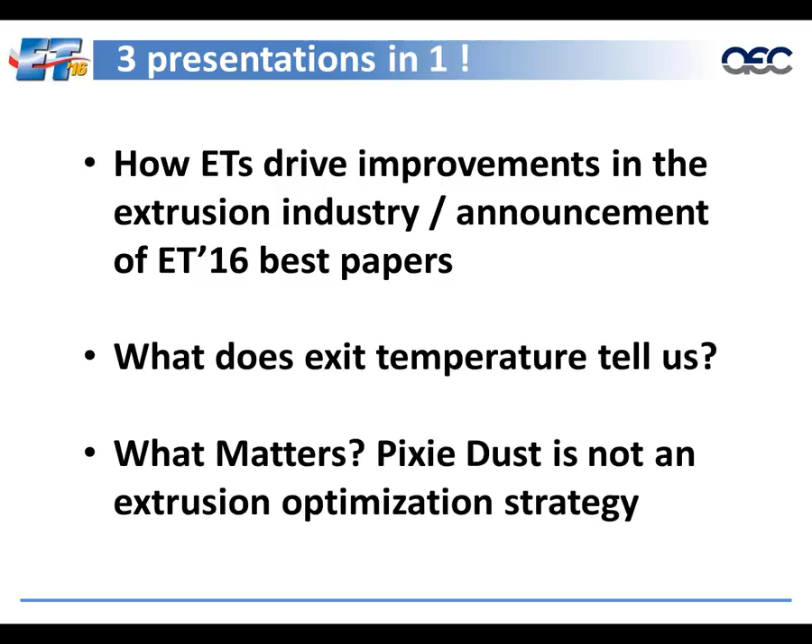Hello, everyone. Today we're going to have the opportunity to talk about 3 different topics. First, we're going to discuss how ETs have driven improvements in the extrusion industry, and we're going to give you a sneak peek at what the best papers are for ET. We're going to announce them. Second, Chris is going to tell us about his ET paper on what exit temperature tells us. And the third part of the webinar will be my paper on what matters, pixie dust isn't an extrusion optimization strategy. So let's dive right into it.

Just a quick thing on my background. I've been around aluminum extrusion my whole adult life, working for different companies, Alcoa, Werner Extrusion Solutions and Consulting, and now with Kaiser Aluminum. Enjoyed every single one of them. And I've been involved in ETs for over 30 years as well, from the time I started in the industry in 1983 until the present, in all different types of roles.

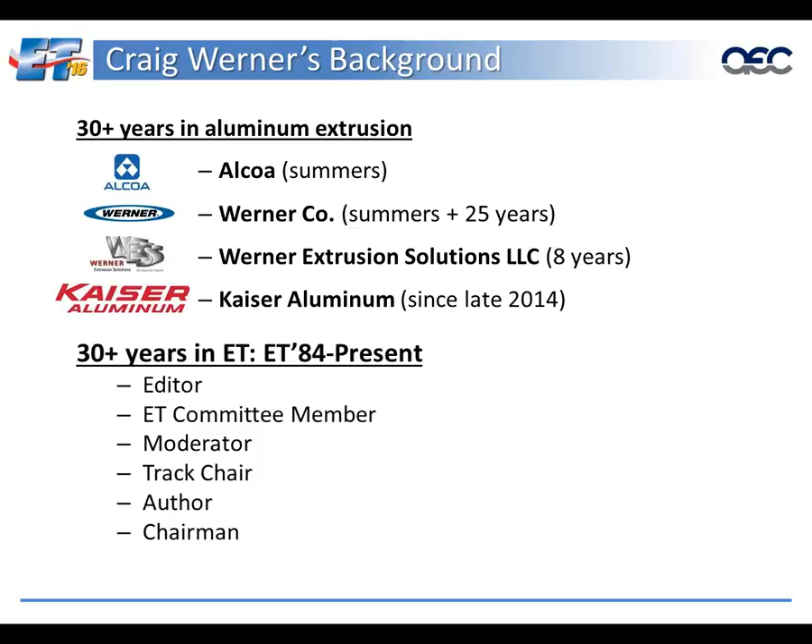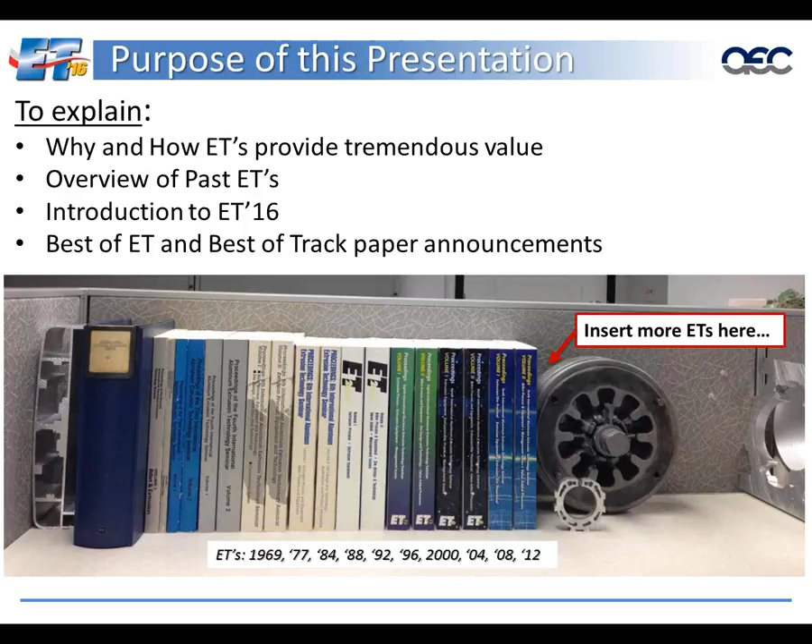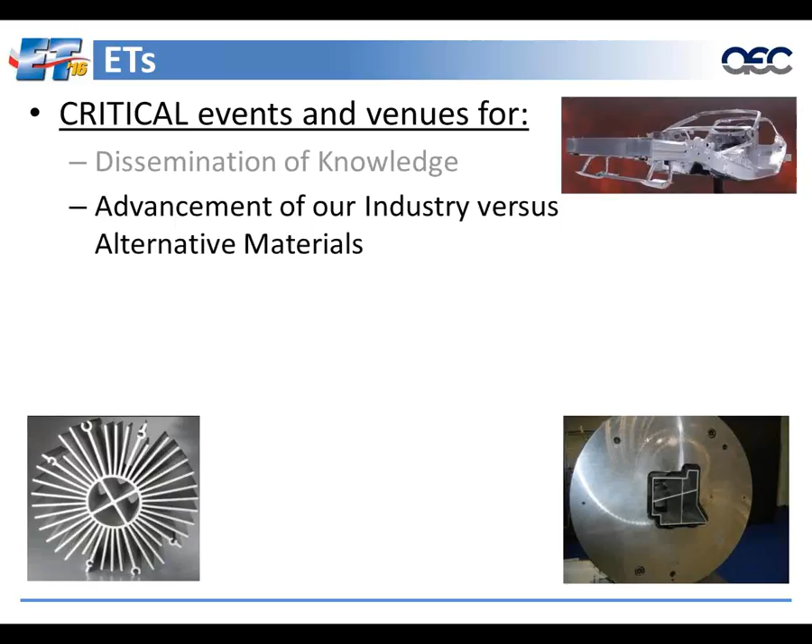I like this picture because it gives you an idea of the quantity of papers that have been published. Later you'll hear that over 1,400 papers will have been published by the time ET 2016 is over. But all of these books from left to right represent all the ETs and the proceedings that went on. There's tremendous value here. There's room for more ETs afterwards, and the next one, as Lisa said, will be in 2020. So ETs are a critical event for disseminating knowledge among our industry and for helping to advance our industry versus alternative materials. We compete with each other, but we also compete with alternative materials.

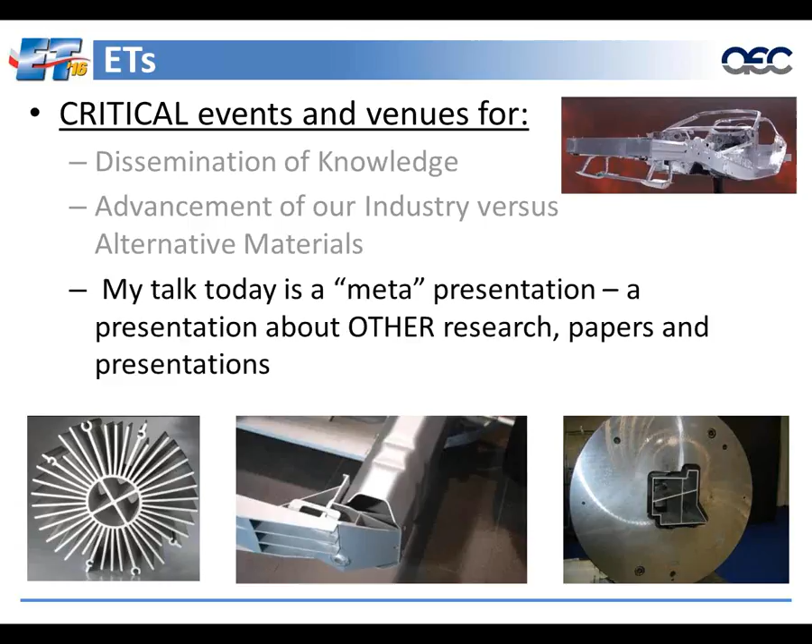My talk today is going to be a talk about presentations, about other research, about papers, not necessarily about anything in particular other than ET, which is critically important to all of us.

ETs help us to drive improvements in the material and alloys, our processes, our equipment, and our overall industrial knowledge base. It assists all of our different customers by helping us as suppliers to do a better job. It also helps our customers understand why extrusions are powerful design solutions, a little bit about our materials and processes, and how to create effective and efficient designs.

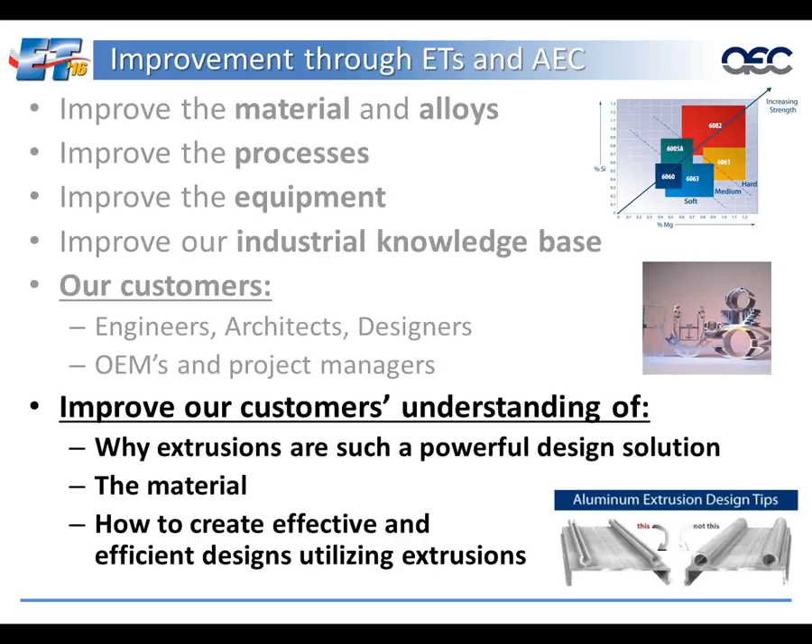There's a number of things that come out through ETs and other AEC venues. So the ETs, as we've listed, from 1969 till 2016 now, over 1,400 outstanding technical papers. We were at 1,289 as of ET 12. And for me, what's always exciting is to get the ET schedule and just start circling all those papers that we want to go to.

Often there's multiples, there's 5 or 6 tracks happening at the same time, and we have to choose. Got to make some tough choices, but at least you have all the paper presentations to lean on afterwards.

We use something called ET time, and it's not a funny thing. It's actually serious. ET time is very, very important because we all rely on being able to go to all these different papers and events.

And Bob Werner taught us something about ET time. First of all, he taught us that time marches on. There's a lot of different people, volunteers and professionals working on at the AEC and on the ET committee. And Bob learned how to drive things through impending events so we could continue to move forward.

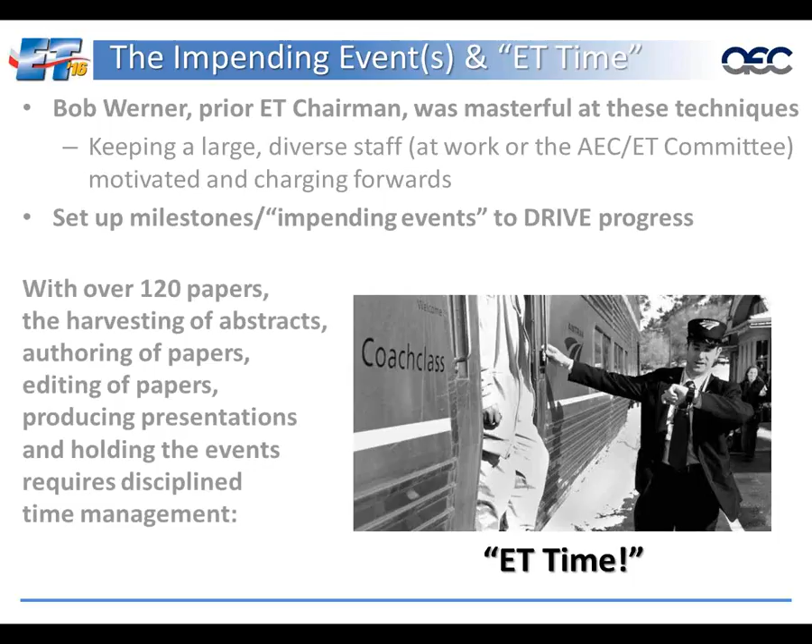This was important because we've got over 120 papers. We've got to go through all the abstracts. People have to author the papers, edit them, produce the presentations, and a lot of work behind the scenes to get this done. And we keep things moving over the 4-year ET cycle.

We have a saying, please set your watches to ET time, and that's important because during these sessions we have a number of general sessions and a number of overlapping tracks that meet at the same time. During those tracks we have 20-minute presentations followed by a 5-minute Q&A and a 5-minute chance to change rooms if you want to between the papers.

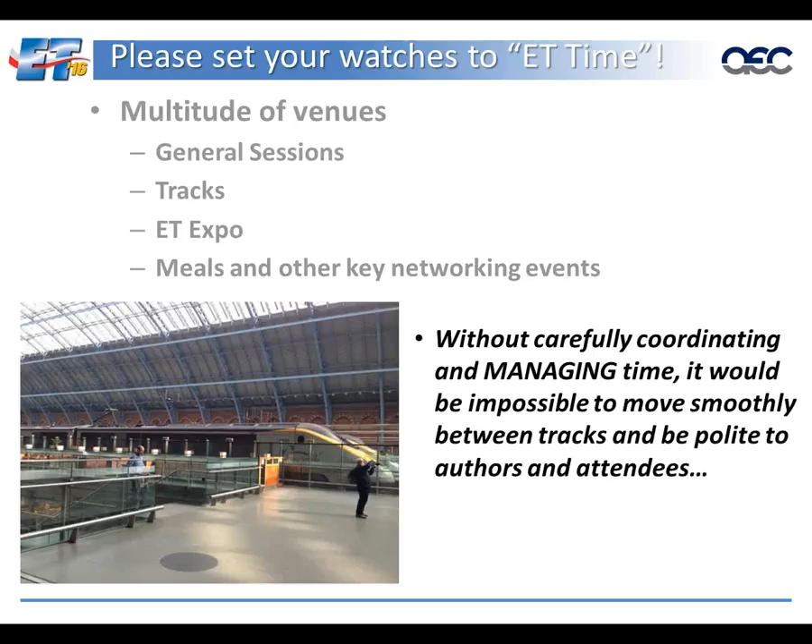If you don't set your watch carefully, you won't know exactly when to leave or arrive in the next room to make sure that you're not interrupting anybody. So it's very important that we all keep track of the time. Without this, there would just be no way to have a smoothly running conference. So we'll remind you of that at the beginning of ET.

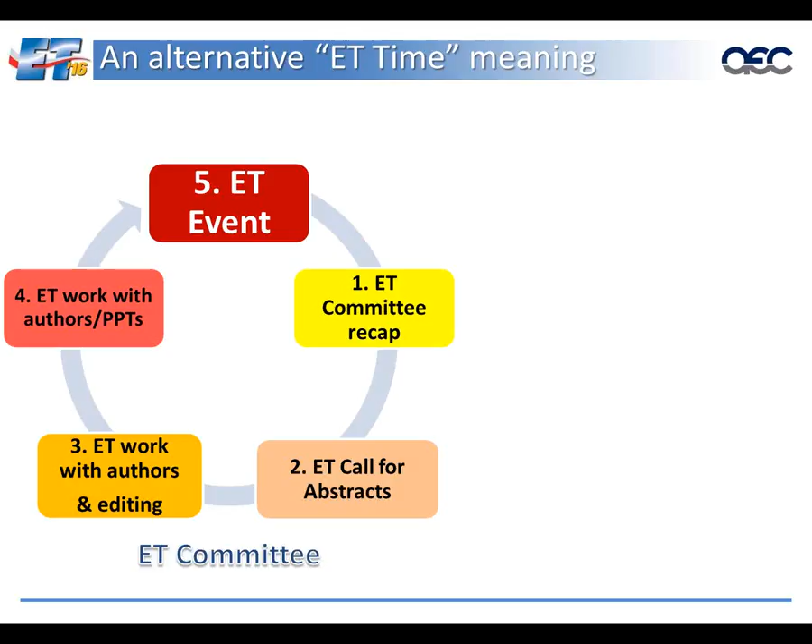The other alternative meaning of ET time is the ET committee works through: first we start with a committee recap of the last ET. We send out a call for abstracts. We work with the authors on their papers and presentations. And then finally we hit the big event, number 5.

At the same time, you've got companies and universities on their own time schedule, working through their project concepts, technical development, and finally completing their papers and presentations.

ET is the sole event worldwide and the most important event worldwide that focuses exclusively on the materials, equipment, processes, and other things related just to the aluminum extrusion process.

The presenters that we use have been vetted to give us some really excellent work and value to all of our attendees. ET is a worldwide offering, and we bring the best research, technical, managerial, and other concepts from around the globe. And all of those people who are also from all around the globe come not only to benefit from the presentations and actively participate, but they get to share knowledge and network with other people.

And there's simply nowhere else on earth you can go to see so many aluminum extrusion people working together, sharing information and networking, just on the topic of aluminum extrusion.

So when we look at ET, it's made up of a number of things. We have the team that's set up, we have the abstracts, the published papers, the presentations, the venue where it's taking place. We have the ET Expo, which is the exhibition hall. Alyssa said we have 120 different exhibitors. We have the showcase where we see examples of different extrusions and how they're used. And probably most important, we have the networking opportunities to meet with your peers from all over the world.

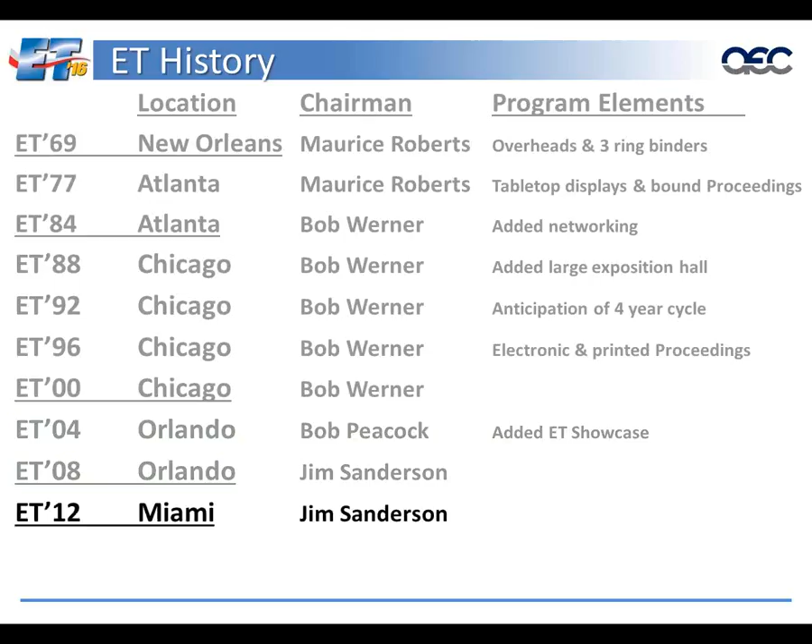In the next 2 ETs, 04 and 08, held in Orlando, the ET Showcase was added. ET 12 was in Miami. And ET 16 is in Chicago, back again to Chicago.

At a high level, when these ET papers are written, whether by a company or university, the concept has to be conceived of and approved. You've got to schedule all the work, the studying, resources, lab time, production time. You have to develop hypotheses, run experiments to test them, and adapt plans depending on results. You might have to make changes, then finally draw conclusions. But you're not done then, because you have to draft the paper, submit it for approval, get the final technical paper sent in and approved, and then finally the presentation needs to happen. So these authors, presenters, and all the technical people behind them put in a tremendous amount of work preparing for ET, and we thank them for their contributions to our industry.

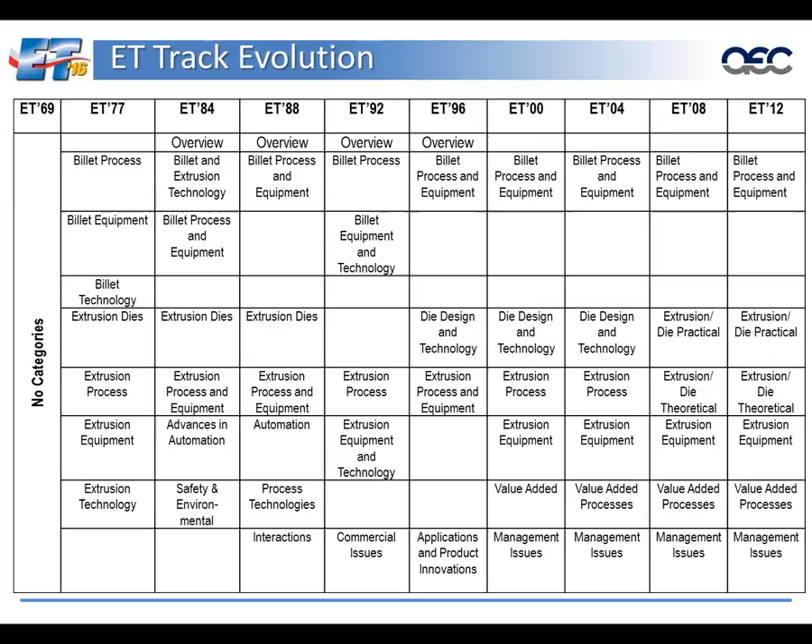I'm not going to go through this slide in detail, but it's from a light metal age article I published years ago, and it shows the evolution of the tracks over the years, which is interesting. We've settled on our more traditional tracks in ET8 and 12, even ET4. But looking back in '69, there were no tracks at all, just a bunch of papers. The tracks allowed us to organize things, collect papers under different categories, and advertise for the need for papers in these categories.

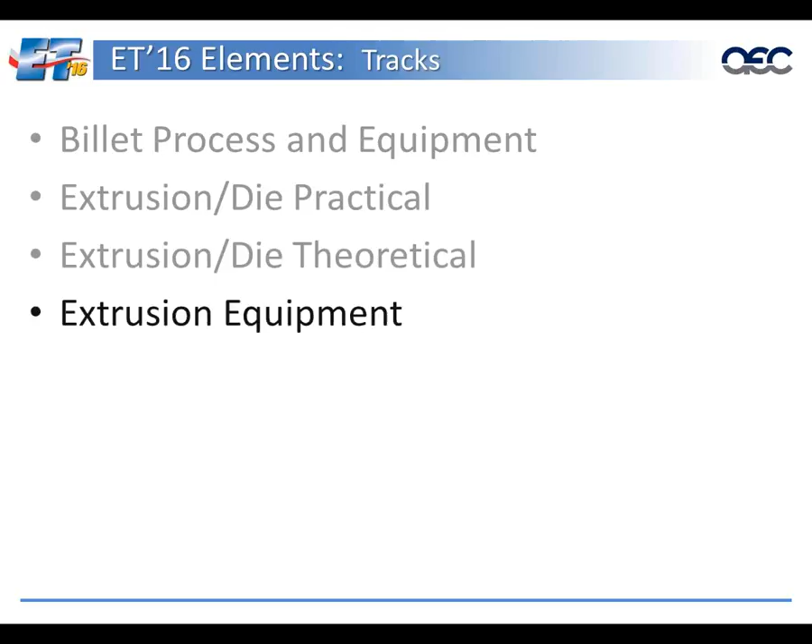So the tracks we have for ET16 are billet process and equipment, extrusion and die practical, extrusion and die theoretical, extrusion equipment, value-added processes, and management issues. Those are our six tracks.

At ET, we have companies and universities working together, and I used the word co-opetition I found somewhere. We have researchers and authors working together, sometimes alone, sometimes together, and they're not competing, but sharing to improve our industry. Because while we compete, the true competition is the alternative technical solutions and materials available besides aluminum extrusion. We want to make sure extrusions are used in the designs and applications where they're the best solution.

This ET, we're going to have papers covering alloy and process controls to help us make better products for key industries like automotive. It's going to cover casting technology information where we'll learn about billet quality, extrusion process, and the resultant product enhancements. There'll be aids to product designers and extruders to really understand our total value stream and how to optimize it. There are some novel extrusion equipment technologies that will be set forth, explained, and demonstrated.

As always, some key die design and maintenance approaches to improve quality and cost in our operations. Some alternative approaches to finishing for enhanced performance and environmental impacts. Key safety concepts are also always discussed at ET—it's a critical thing that we cover. And we'll all learn more about key extrusion variables and how we can use these things to best optimize our productivity, quality, and costs.

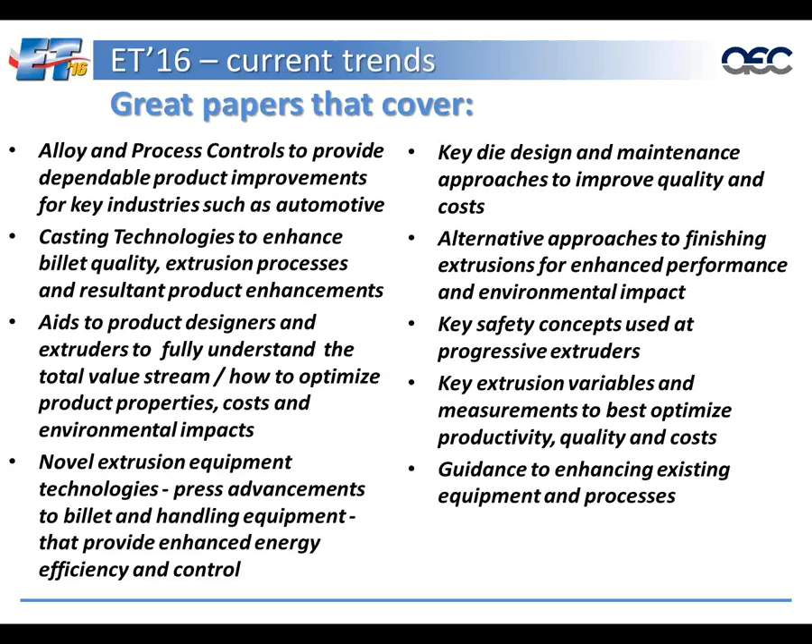So the best paper of ET16 is Extrusions for Automotive Crash Applications from Rio Tinto. Congratulations to them. And now we're going to go into the best of the six tracks.

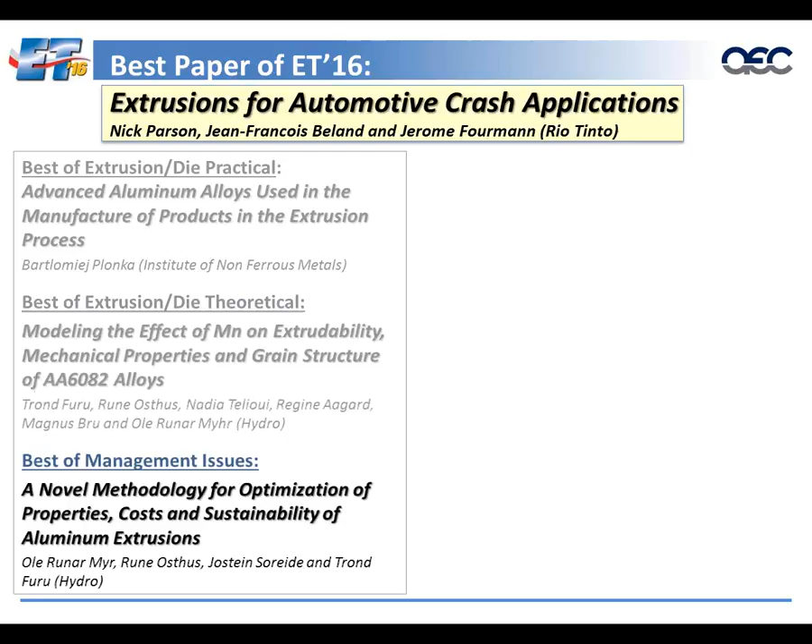The best of Extrusion Die Practical is Advanced Aluminum Alloys Used in the Manufacture of Products in the Extrusion Process. Best of Extrusion and Die Theoretical is Modeling the Effect of Manganese on Extrudability, Mechanical Properties, and Grain Structure of 6082 Alloys. Best of Management is A Novel Methodology for Optimization of Properties, Cost, and Sustainability of Aluminum Extrusions. Best of Billet Process and Equipment is Innovations in Billet Casting and Homogenization. Best of Extrusion Equipment is the Hybrex, an innovative extrusion press with hybrid drive technology.

The best of the value added paper will be on surface topography of aluminum extrusions after caustic and acid etching, and its implication for defects.

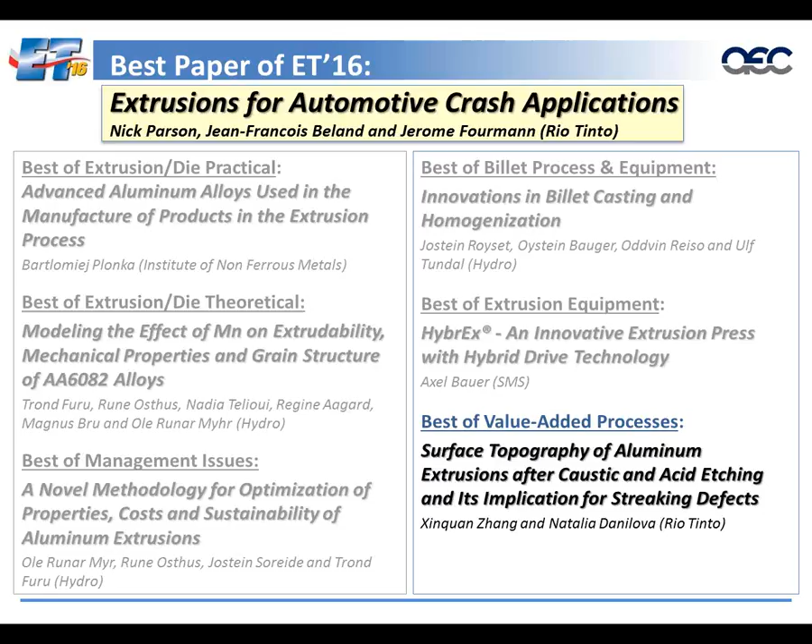One thing a little different at this ET is that all these best of papers won't be competing with some of the other papers. So when you review the schedule in detail as you map out your plan, you'll find that everyone will see the best of ET paper on top, but out of the 6 below, you'll get to see 3 out of those 6. There'll only be 2 of them competing with each other at any given time, which is a change to our process.

The team that makes up ET is the upper level team, myself and Jim Sanderson and Bob Peacock, both past ET chairs, with a lot of experience there. And then there's a committee of over 30 people that work with the authors and the staff to really deliver an outstanding conference for all of us.

And speaking of outstanding support, we get that from the AEC staff. We just have some terrific people that keep this process moving through the 4-year cycle and make it all look easy when we show up at ET.

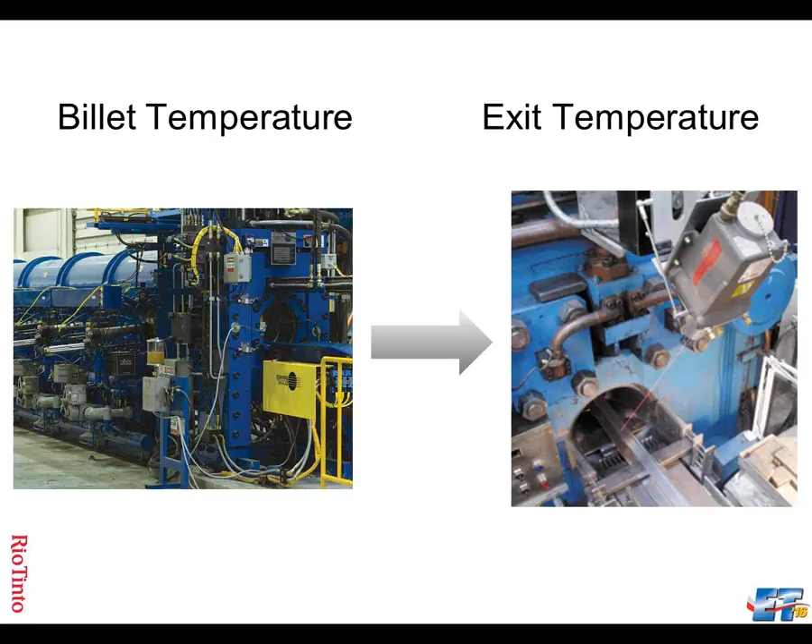We measure 2 basic temperatures: billet temperature and exit temperature. We don't really measure a lot between there. We control die temperature, we control container temperature, but we don't really measure temperature rise in the container, or what's happening in the die as we extrude. Although it's quite easy to do so in the lab, it's not something we can do easily in production.

However, when you think about it, there is another benefit. It can help in achieving consistency. It tells us if we're running at a certain exit temperature as measured by the pyrometer, then it tells us we're running the same as yesterday. We can produce consistency. But this is only useful when you say, for example, for die 1234, exit of 1050 Fahrenheit is perfect, and then we can run that every day and get good consistent material, consistent performance.

Exit temperature tells us nothing about what's happening at the bearing, what's happening in the container as the metal flows through, which really is the thing which determines finish and die wear.

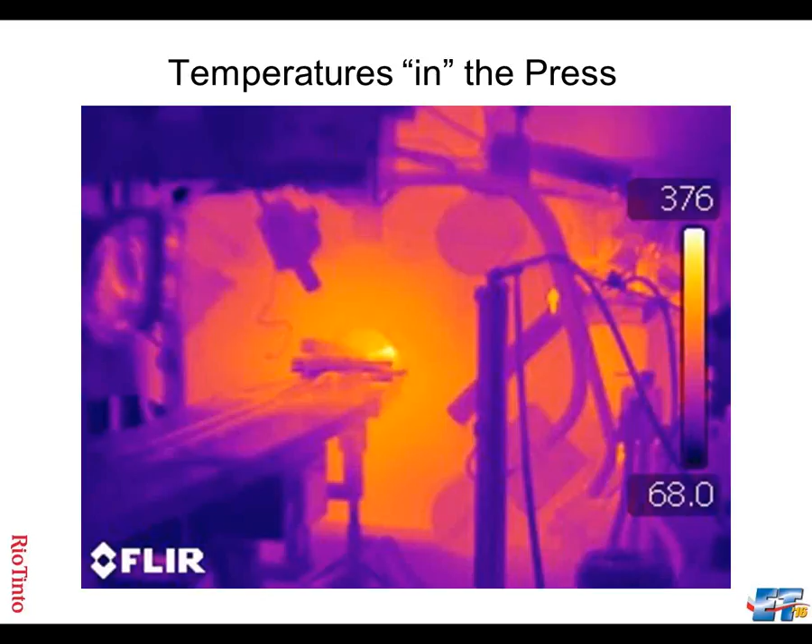It shows us that what we measure at the exit of the press is substantially colder than what's happening at the bearing. What we wanted to do with this paper was relate these two, find the rules which relate measurements at the optical pyrometer with what is happening at the die bearing. If we can calculate the bearing temperature using optical pyrometer values, we're getting much closer to maximizing productivity and speed.

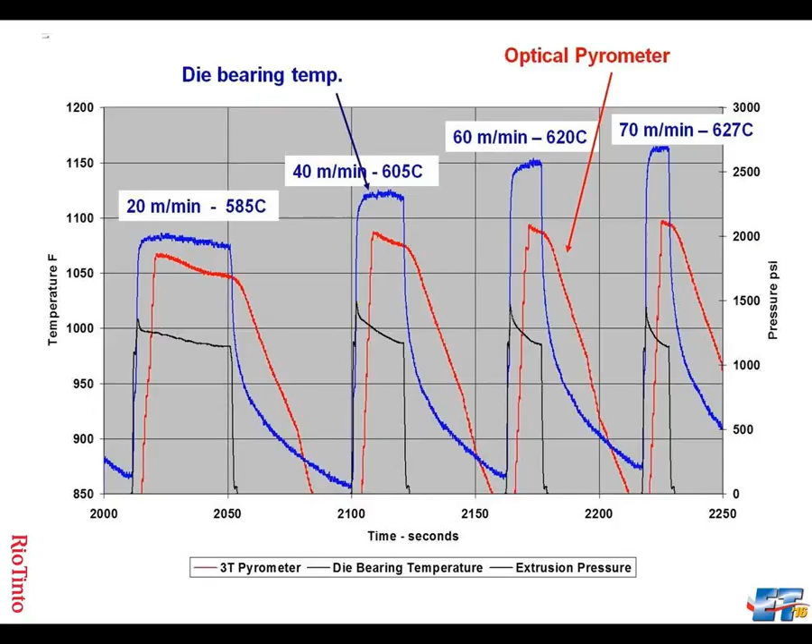This is some data we recorded a long time ago, back in British Alcan Extrusions days. What we did here was run a series of dies at maximum speed. Maximum speed we determined as being the beginning of speed cracks, surface melting, a bright surface, which is about 1160 Fahrenheit, 630 Celsius. We found that the measurements of the optical pyrometer at this point were substantially lower than the bearing temperature. Yes, we know that.

However, it did seem to vary with profile thickness. It's an interesting observation. For example, if we want to run a profile which is, say, 60 thou wall, 1.5 millimeters, as fast as we can, we should really be looking at a pyrometer value of about 1075. If we run a profile which is 5 or 6 millimeters thick, we really can't go much above 1015 Fahrenheit because we're going to produce a melted surface. This tells us there are some interesting relationships.

So what we decided to do for this paper, since we can't measure this stuff on a production basis, is to model it. We used a commercial finite element package, Deform 2D, in fact Deform 3D. We used it for simplicity, along with a very neat tracking tool.

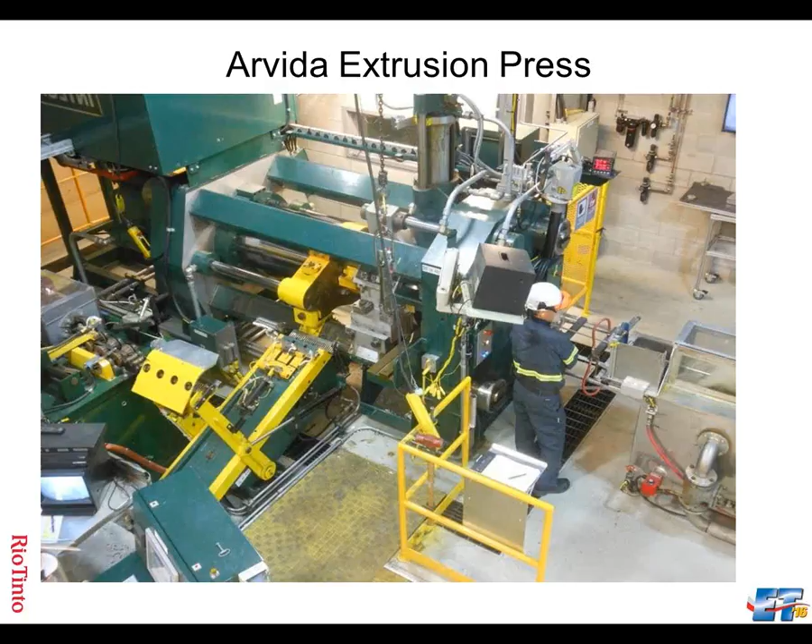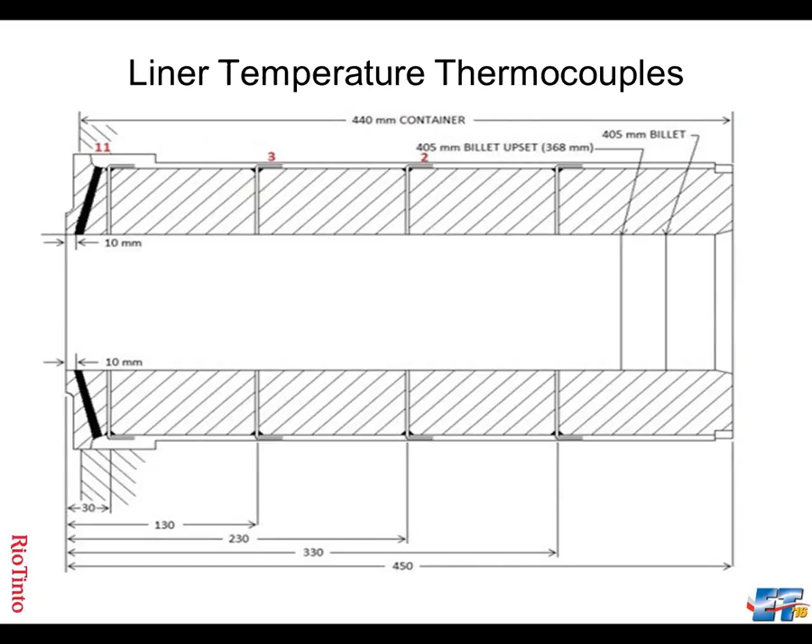The first thing we measured was container temperature. On this press we have thermocouples located at the liner wall, so we can measure accurately the temperature of the billet as it extrudes. And the kind of data we got was this.

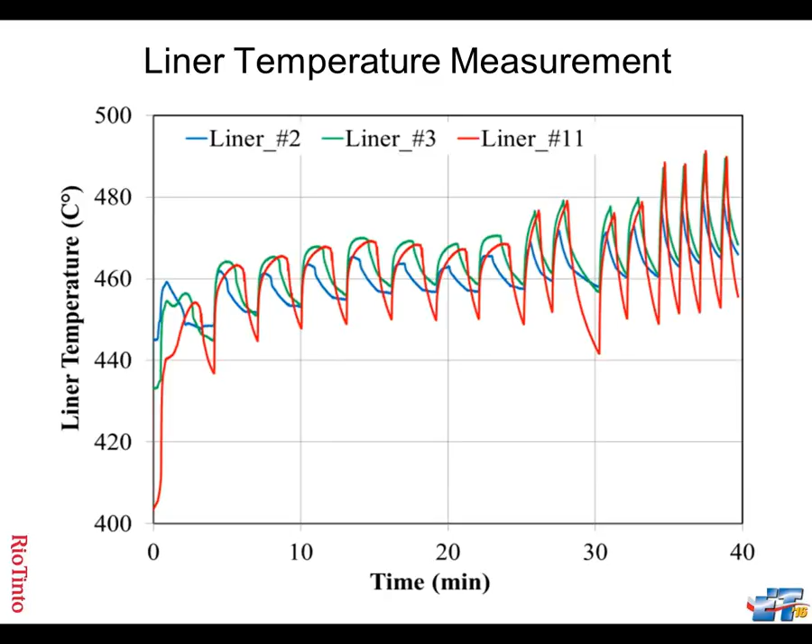This shows the liner thermocouple varying on a 16 billet run: 4 billets to preheat, 4 billets at low speed, 4 billets at medium speed, and 4 at high speed. It shows the cycling, and shows us that the thermocouple located near the die end of the container has a temperature rise of something like 450 to 490, about 40 degrees Celsius. This data we can use to see how the model can predict this sort of information.

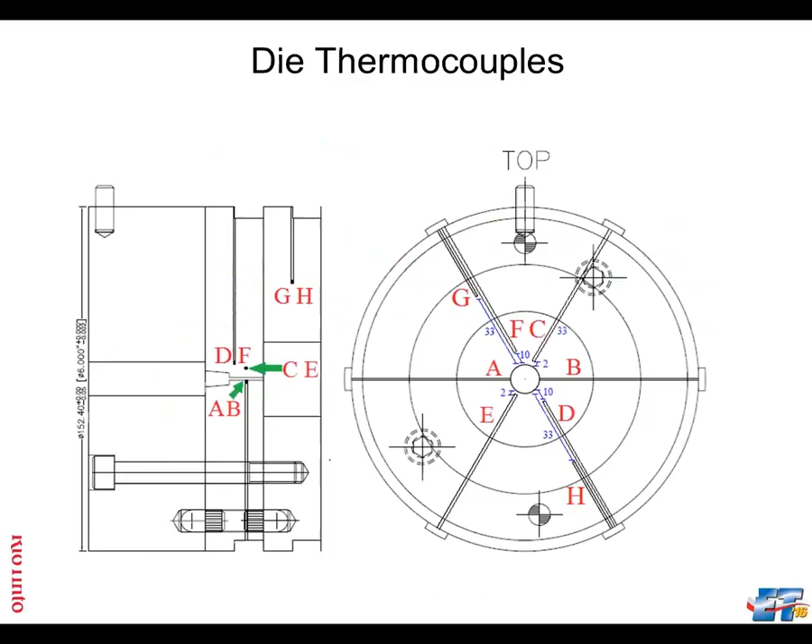The second thing we did was run this die. This die we used for these tests was a simple half-inch bar. We filled the die with thermocouples and measured temperature, and this is some of the data we got, again with this 16-billet run. If you look at the right-hand side, when we're running at high speed, the temperature at the bearing varies between 440 up to 600.

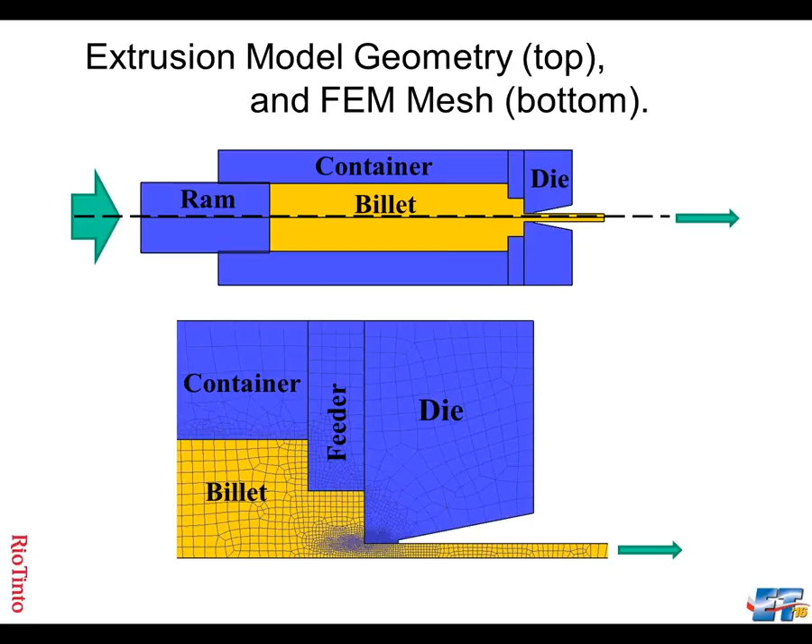So with this data, we could test our model, and this is the model we used. As I say, it was DEFORM 2D in this case. The upper figure shows the model, the bottom figure shows the mesh, which allowed us, and I'll just give an illustration of the kind of information we got from this modeling.

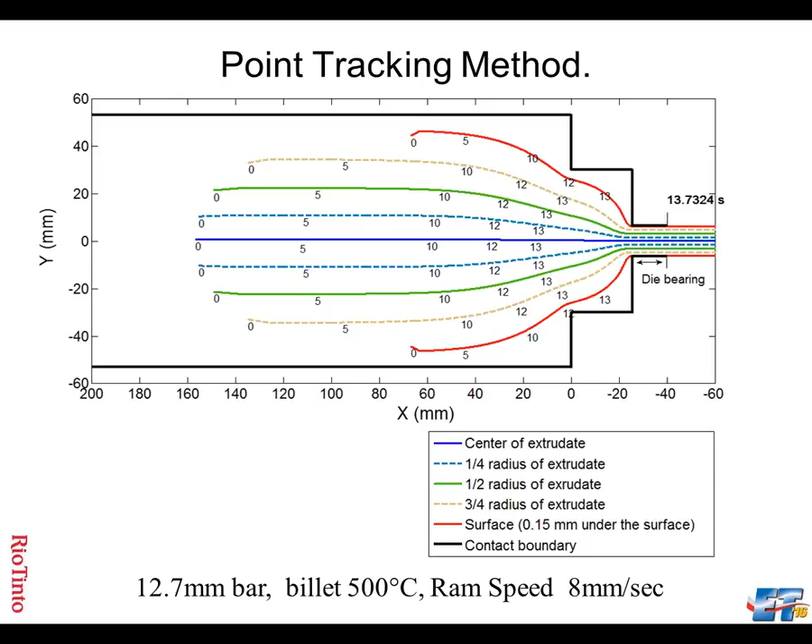We used a point tracking method, which is a rather neat way of measuring and predicting what the temperature is through the thickness of the profile and throughout the container. On the plot you'll see numbers, that is time. You can see the metal is the red metal, for example, on the outside, the red flow path, which is the material going to the bearing. It runs a lot slower than it does through the center. This is in seconds.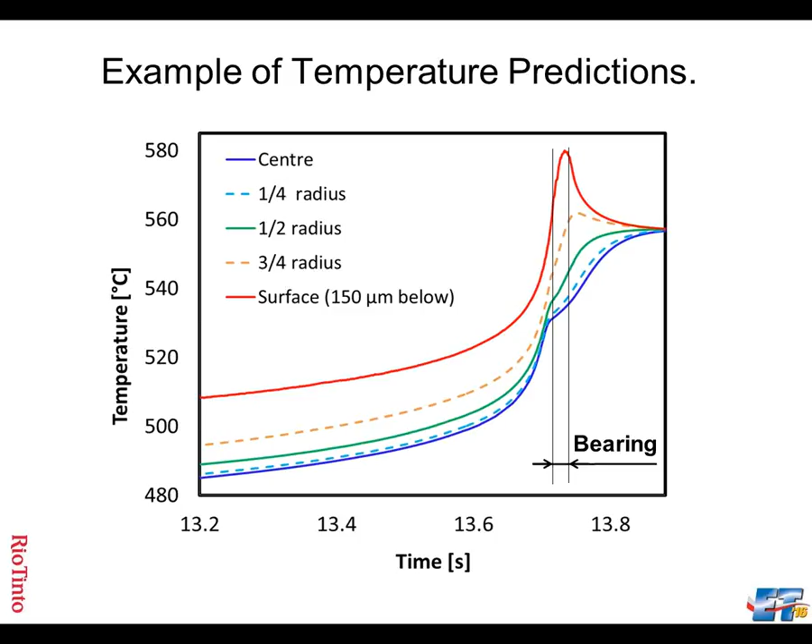And we have the plots at various positions across through the thickness of the profile. What is really interesting with this is how fast the temperature drops between the surface and the core, and the material becomes more uniform temperature. It drops to 560 Celsius, and this occurs within about 0.1 of a second. And I'll just show you a couple of illustrations of extremes.

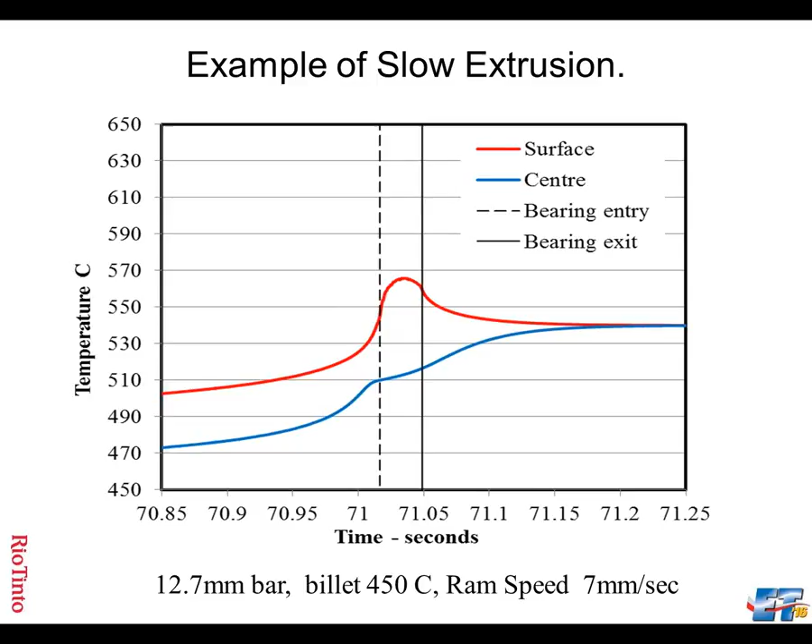This shows the flow of metal through the die at low speed. Surface temperature something like 565. In this case, we're showing at low speed the temperature drops from the surface of about 1050 Fahrenheit, drops to about 1000 very rapidly. In this case, it's 0.2 seconds between the maximum and by the time it reaches uniform temperature. So this gradient has vanished very fast.

We often think, we believe that dies run hot, and by the time we measure them, it's cold, and we think it's something to do with cooling. It's not. It's purely due to conduction within the profile, and within 0.2 of a second we have a uniform temperature. And I'll just show you this plot.

Maybe it's not that clear, but the upper curve here shows what the metal flowing across the bearing does. It rises up to a temperature of 1020 Fahrenheit, cools within 0.2 of a second to 945 Fahrenheit. By the time we measure it at the press exit, it's 930. So the cooling is only 15 degrees, but the actual conduction and the reduction of this gradient happens in a matter of 0.2 of a second, and it's well over 100 degrees Fahrenheit.

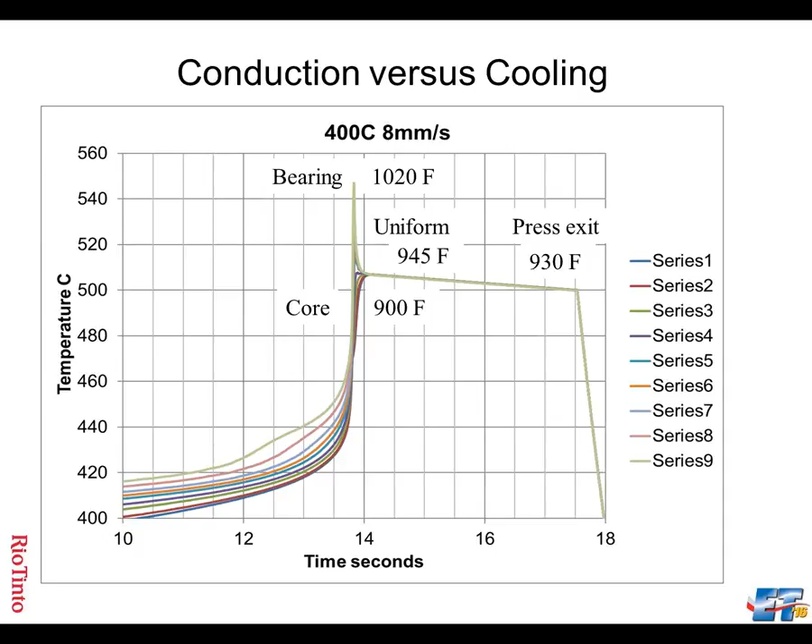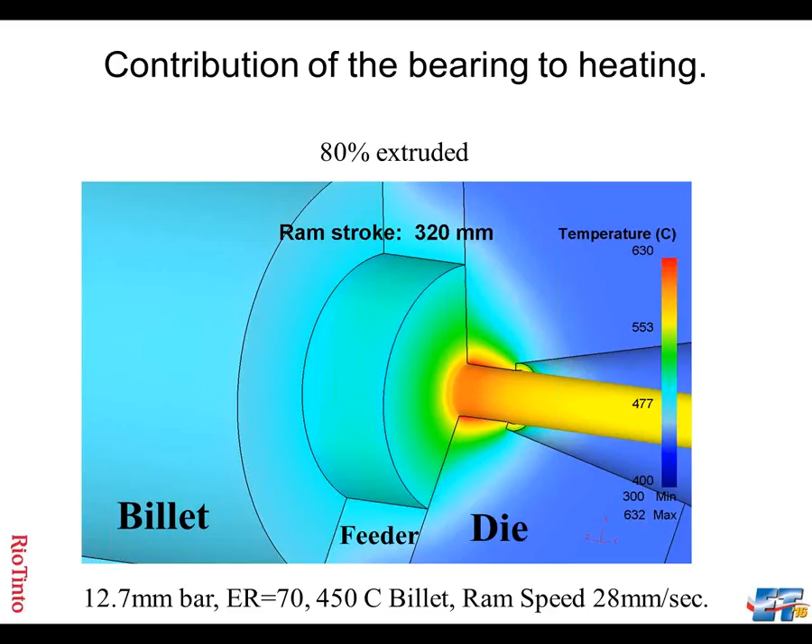And I'll just show you a couple of illustrations of the kind of thing we can model. This is 5% of this material extruded. This is 30%, 80%. You can see that the temperature is extremely local. The material, after leaving the die, becomes uniform in temperature within a fraction of a second, long before the metal's left the bolster. We're never going to be able to measure this. That's why we think modeling is so useful.

Just to give you a couple of other illustrations, what can we predict? This shows the surface temperature in the bearing. It's a 15mm bearing for this profile. You can see that the temperature is hotter, obviously, as you extrude faster. The maximum temperature is in the middle of the bearing.

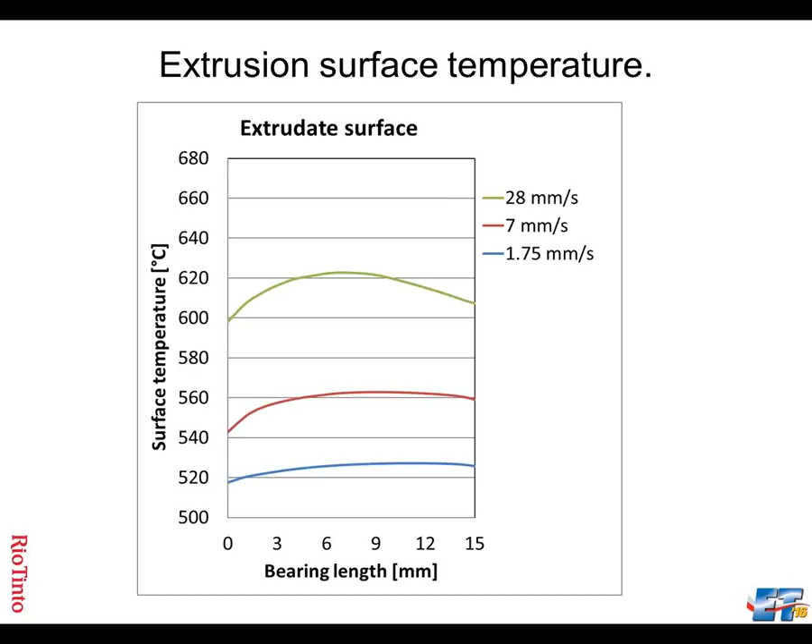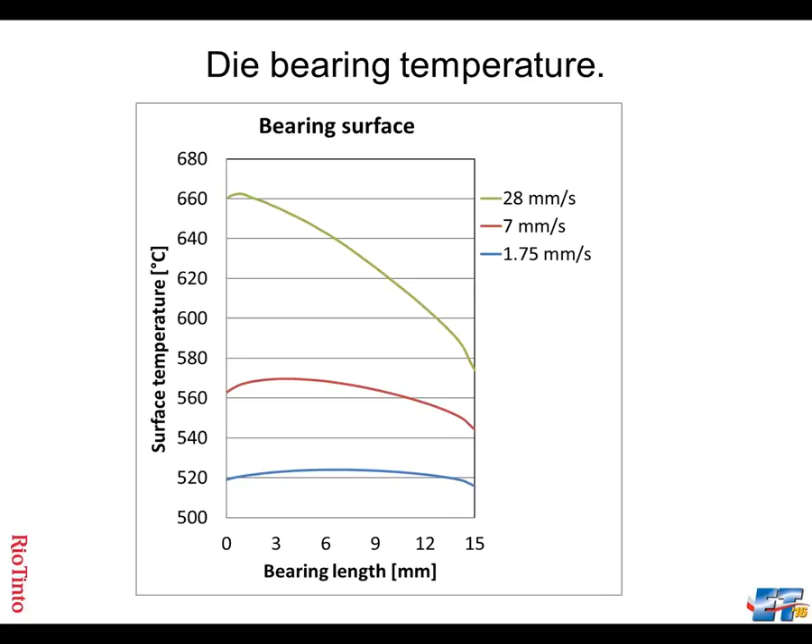This is the profile. If we look at the other data, the temperature of the die, it gives a very different picture. It tells us that the temperature of the die is again a lot hotter at high speed, but the temperature is highest at the entrance of the bearing, and it drops throughout the length. This maybe is not expected, but it certainly tells us why dies wear at the entrance part. They tend to start washing out at the entrance part of the bearing, not at the very entrance, but near the front of the bearing. And it tells us there is a difference between die temperature and extrusion temperature.

This illustrates and demonstrates the difference. It shows that all the heat is being generated, and you ask, why is this so hot at the entrance and not the back, considering there is continuous shear on the bearing surface? It's mainly because the die is not uniform, and the exit side of the die is colder than the die face. We have a perpetual supply of hot metal coming in, adding heat.

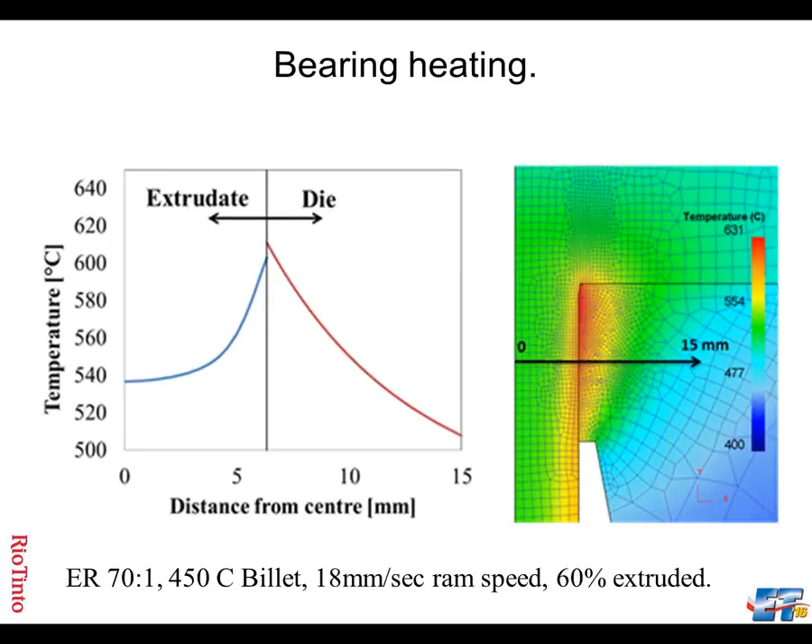So, some conclusions. This is a very brief summary of the paper. We've basically developed a model which gives us very accurate alloy temperatures, and it can predict temperatures in the liner, in the container, which our data supports.

The temperature of the die bearing, which basically controls the surface finish, is significantly higher than that given by thermocouples or an optical pyrometer. We knew this. But at maximum speed, there is a trend for the exit temperature measured at the press platen to be higher when the profile is thinner. This is new.

This says if we want to somehow predict what's happening at the bearing using an optical pyrometer, we have to accept the fact that it varies with profile. Once we've established the rules between profile temperature at the exit of the press and dimensions of the profile, we should be able to predict what's happening at the bearing, and we can run at temperatures which are not too hot for giving poor surface and not too hot for destroying bearings.

The steel bearing is hotter than the extrusion in most situations. This is surprising. At high speed, the aluminum temperature in the bearing is often more than the melting point. Yes, we have measured 660, 670 Celsius, which is well above the alloy solidus, the melting point, but the profile still comes out solid because the conduction freezes it so fast.

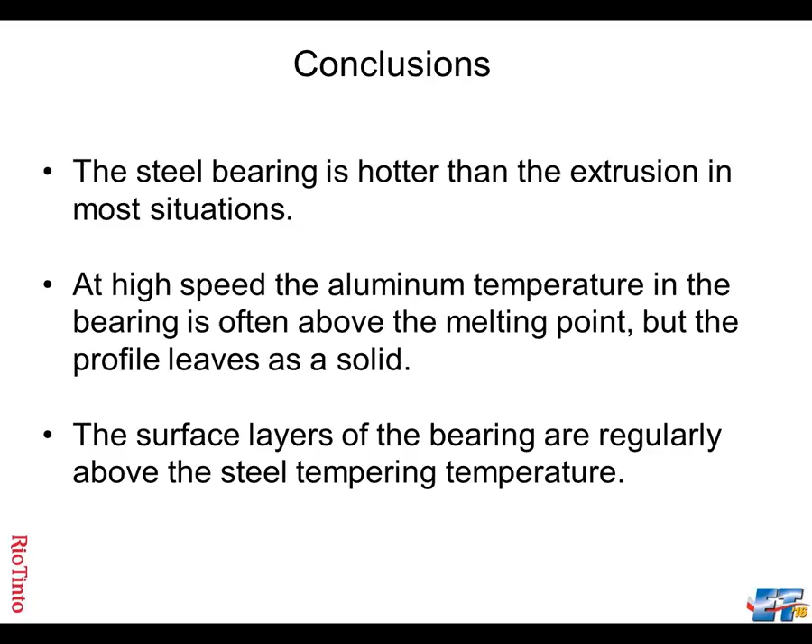The surface layers of the bearing are regularly above steel tempering temperature, yes. And one last couple of conclusions.

We believe it should be possible to estimate die bearing temperature knowing optical pyrometer output and profile dimensions. This is something maybe we can work with optical pyrometer manufacturers to see if there's a way in which we can calculate the exact bearing temperature just with an optical pyrometer.

And there's an exciting possibility. We talk about isothermal extrusion. Isothermal what? At the moment, all we're measuring with isothermal, trying to get isothermal extrusion, is isothermal exit temperature, which really isn't that useful. What's far more useful will be to develop a process which gives us isothermal bearing temperature.

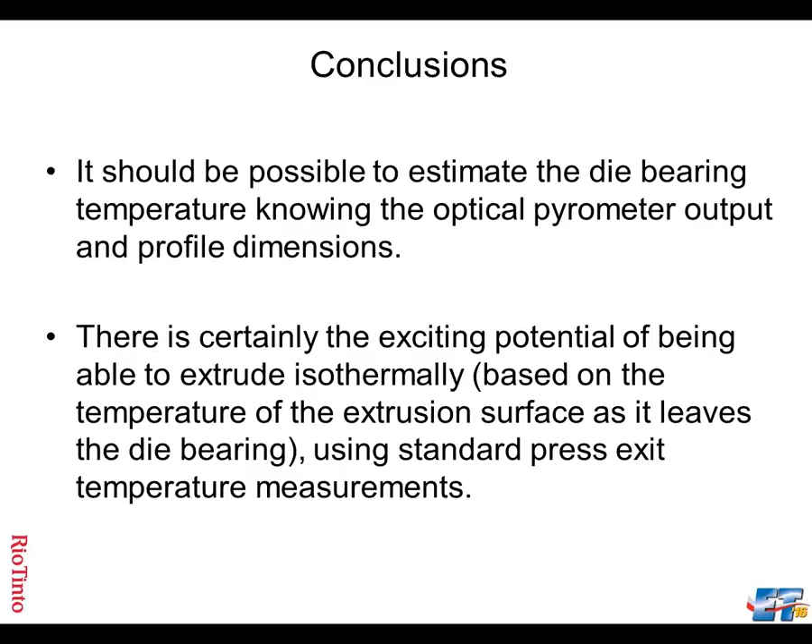And at that point, I will finish, and I'll pass you back to Craig.

Well, thank you, Chris. You certainly whetted my appetite. I'll be sitting in on your talk to hear the other points that you didn't have time to go over with us, and reading through the paper. So thank you.

You noted that there are three key variables: temperature, temperature, and temperature. But actually, depending on who you're talking to and what the topic is in extrusion, other key points are safety, quality, and productivity. Those are three that pop to mind. And in my world, with the optimization work I've done and reported at ETs, it's really data, data, data, and data integrity. So I am going to take us through my presentation.

This one is called What Matters? Pixie Dust is an Extrusion Optimization Strategy. This is an interesting synthesis of a couple of different approaches that I'm going to show you, so bear with me as I take you through it.

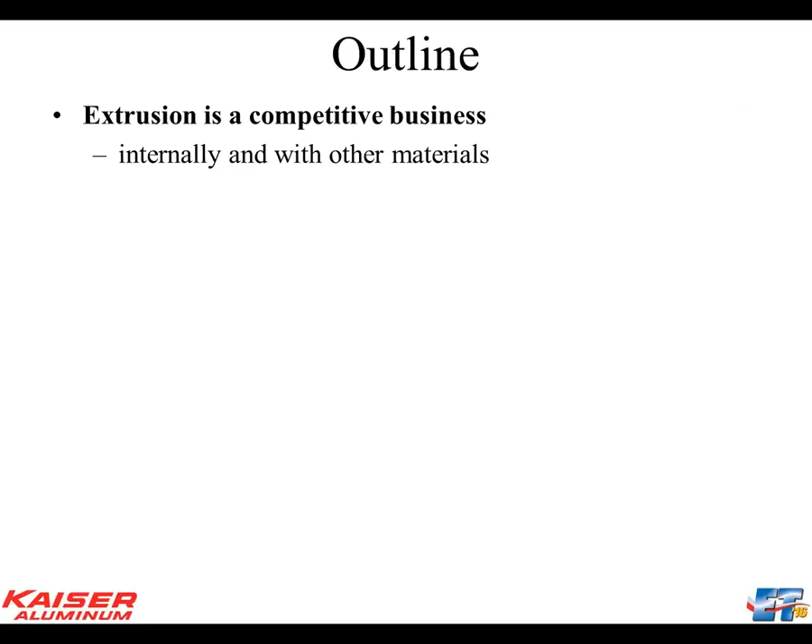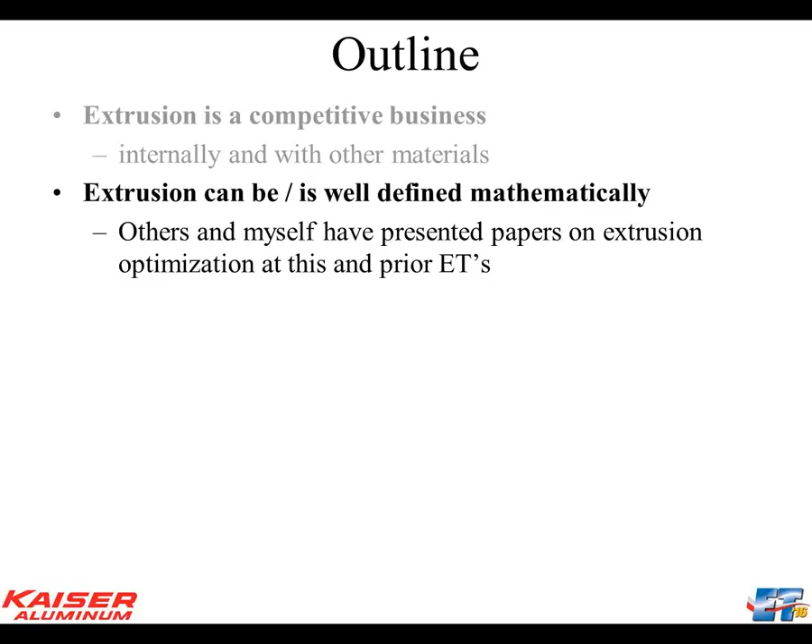First of all, of course, extrusion is a competitive business internally with our competitors in the extrusion industry, but also with other materials. What I love about the process and the material is it can be pretty well defined mathematically, and there's been a bunch of papers on extrusion optimization written about this.

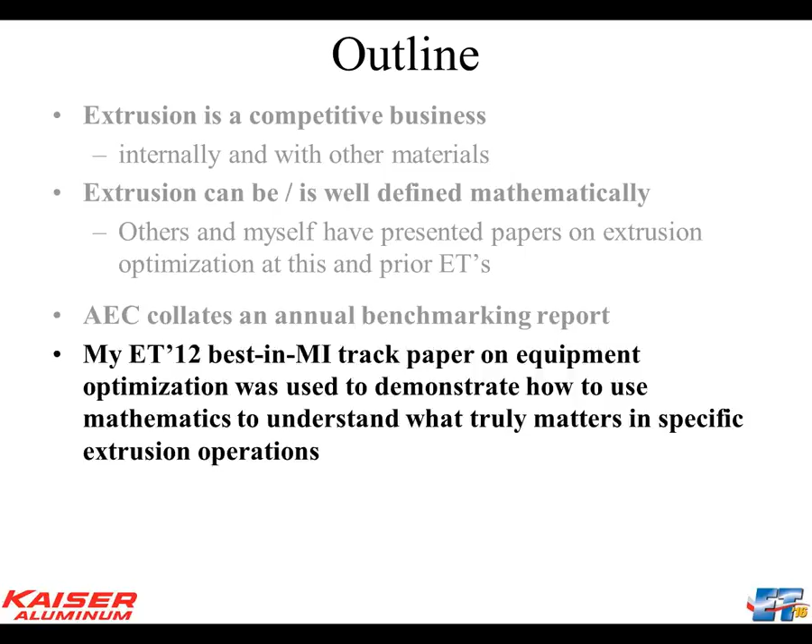We have some good data, which AEC collects for its members. It's called the Annual Benchmarking Report, and I'll show you some pictures of that. In my ET paper, the ET12 paper on equipment optimization, I delved into that same analysis and tied it in with the AEC's annual benchmarking reports to develop what I'm going to show you in this paper. So we're going to combine these two approaches.

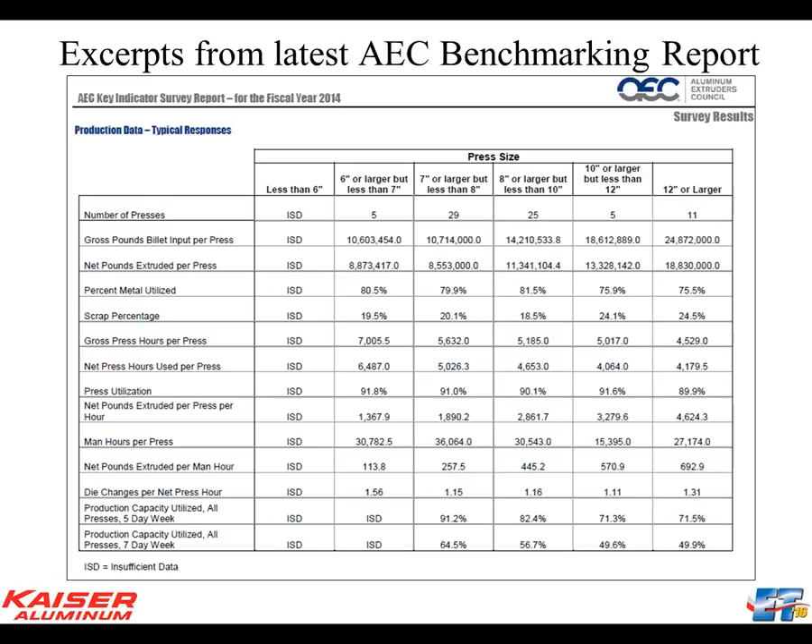First, we have the Key Indicator Survey Report. This is the annual benchmarking report that comes out from the AEC. This is the 2014 cover. In it, there's a great deal of information. I've only copied a couple of slides to show you, but we have information on the number of presses that are discussed and analyzed, as well as the number of pounds, percentage of metal utilized, pounds per hour, that sort of stuff.

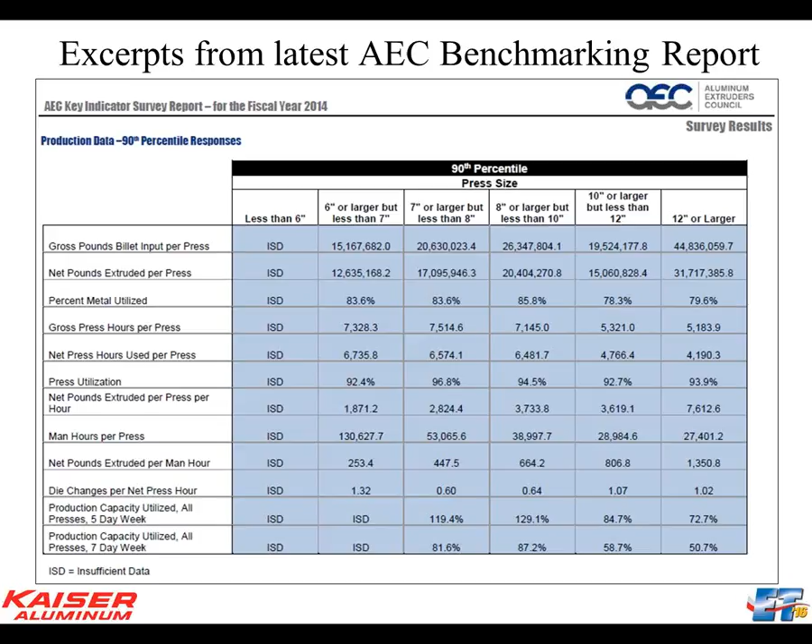There's also information which breaks these presses down into different percentiles. So a 90th percentile response refers to those presses which are at the 90th percent of performance. We can look at typical extrusion presses and also 90th percentile extrusion presses. And then there's more information where you can dig into even more detail: 25th, typical, 75th, and 90th percentile.

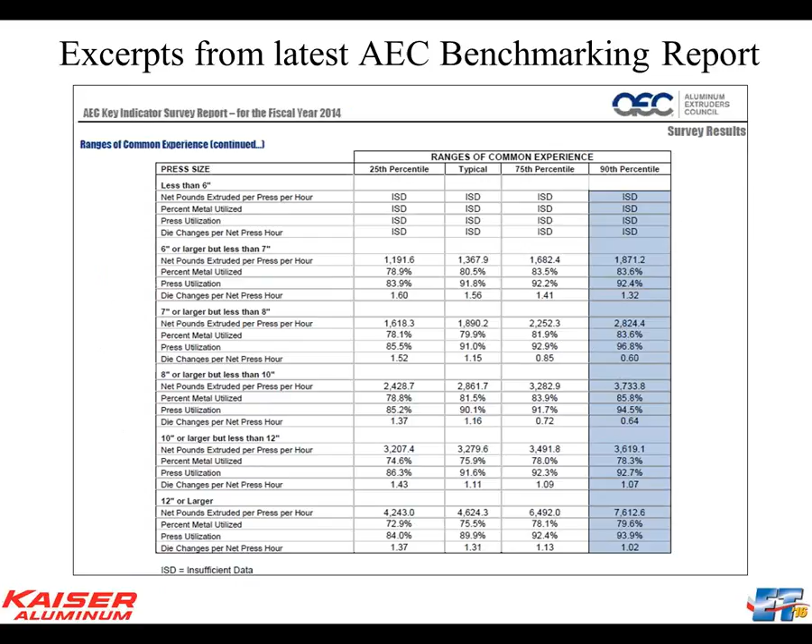There's a number of pages and a lot of data in this report, but these are the things that I focused on. So, looking back to my ET12 paper, I'm going to give just a couple minutes of an overview on that.

Equipment's often purchased based on gut feel or by focusing on just a single area of concern. But actually, by using a systematic modeling-driven approach, you can look at different equipment variables and the types of profiles you might run on it, and model exactly what's going to happen.

So you detail out the equipment parameters, you look at some profiles to model, and then you use the actual model results to forecast the productivity and recovery, and therefore the total annual dollars that will be spent for the mix of product that you're looking at. So it's a powerful way to get some information.

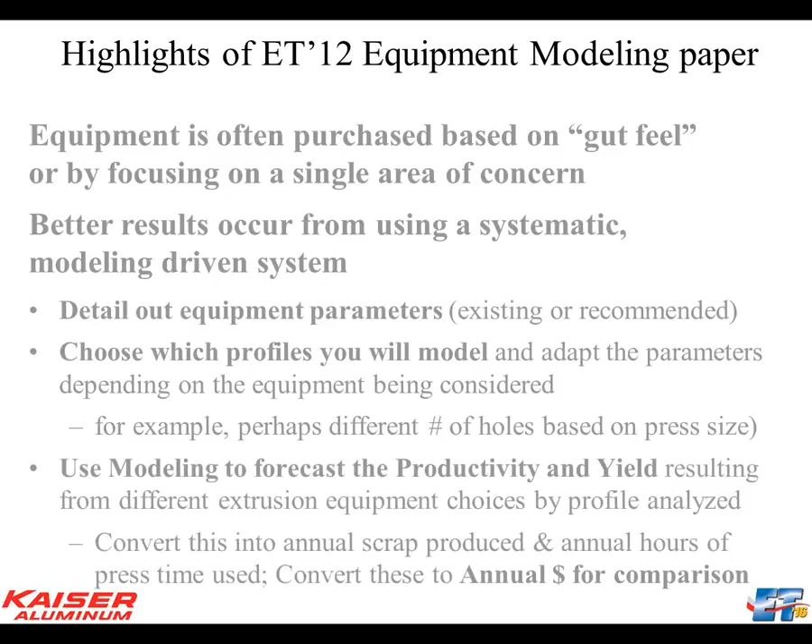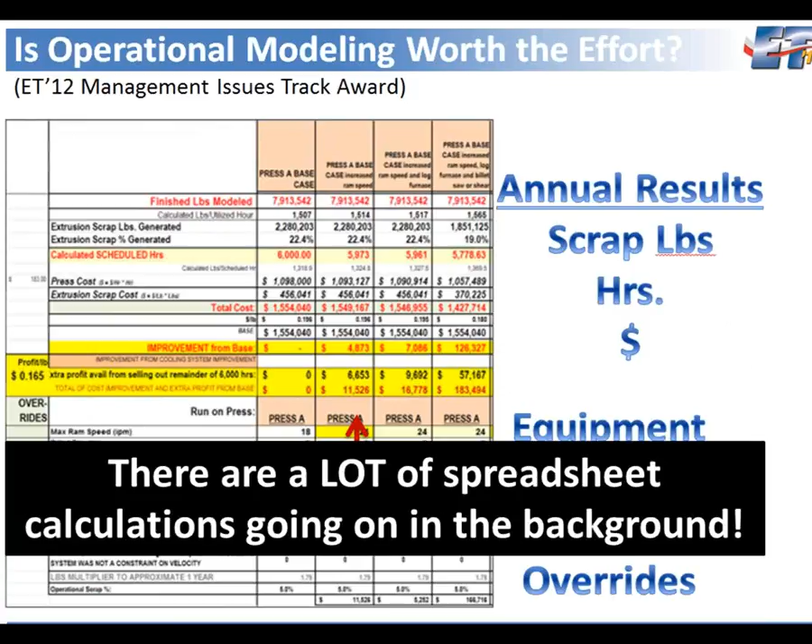I encourage you to go back and read some of my earlier ET papers if you're interested. The results show up in a couple of columns in those papers, but there's a lot of work going on in the background to calculate what's happening.

Ultimately, you can take a look at this chart, for example, that shows for a particular mix of business, as the runout length changes on the x-axis and as the billet length chosen for the container changes on the different colors of the lines, you can see what the total conversion cost is on the left.

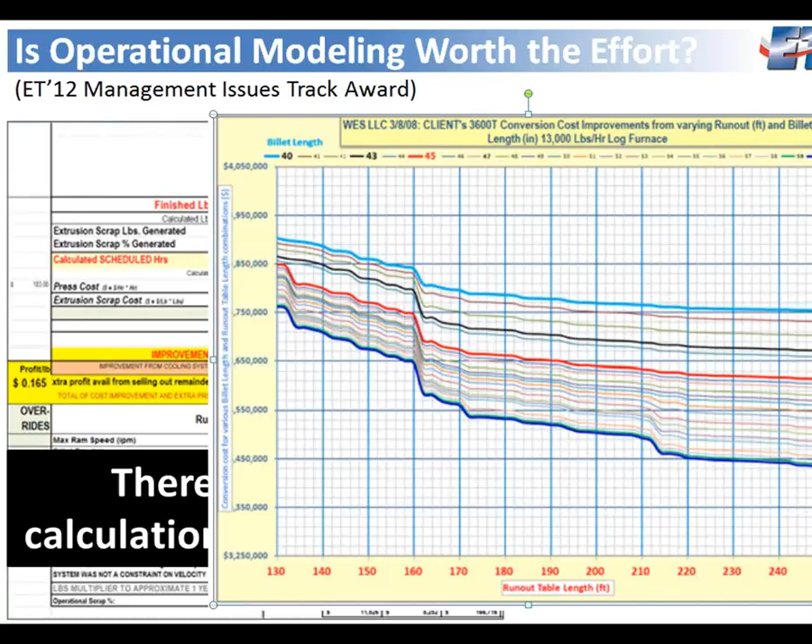So it helps you to see how to match up runout table length and billet table length. This was also done with many different pounds per hour of log furnace, so we had different charts showing this. So once you model it, you can get a lot of great information.

So what really matters? To me, what matters is, first, we have to eliminate and control every possible cause of variation in our process. That's the way we get better control over things. Once everything's running smoothly, we can focus on safety, quality, delivery, productivity, and cost.

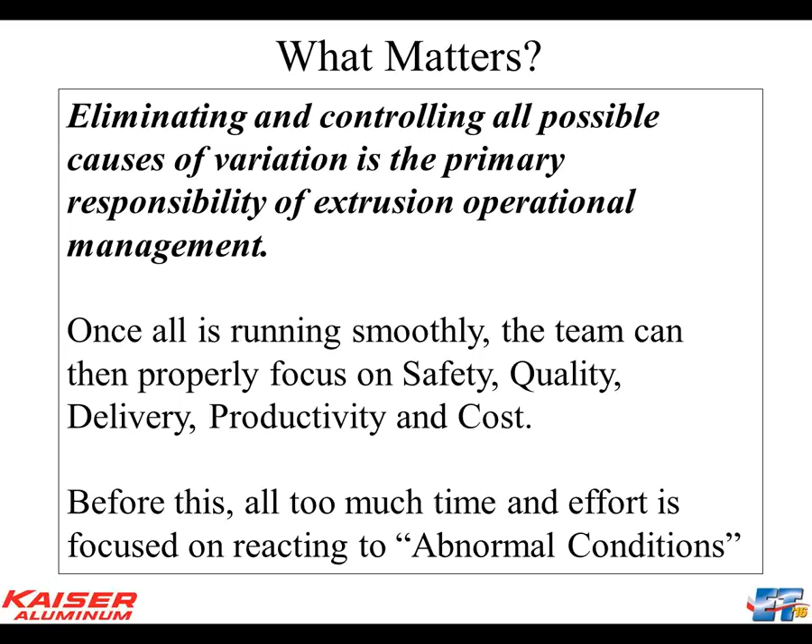But particularly when the equipment isn't running well, when there's a lot of downtime, when there's a lot of interruptions, it's hard to get any of those things performing properly because of abnormal conditions that pop up. So at a high level, that's what matters. But that's not what I'm going to talk about here.

I'm going to talk about looking at the AEC Key Indicators Report and looking at 8 and 9 inch billets. This was listed as 8, but less than 10, so that would typically be 8 and 9 inch billets. I used as an approximation technique 95% of the pounds per hour for the typical extruder, and the 90% extruder were used as an approximation of what an 8 inch press would achieve.

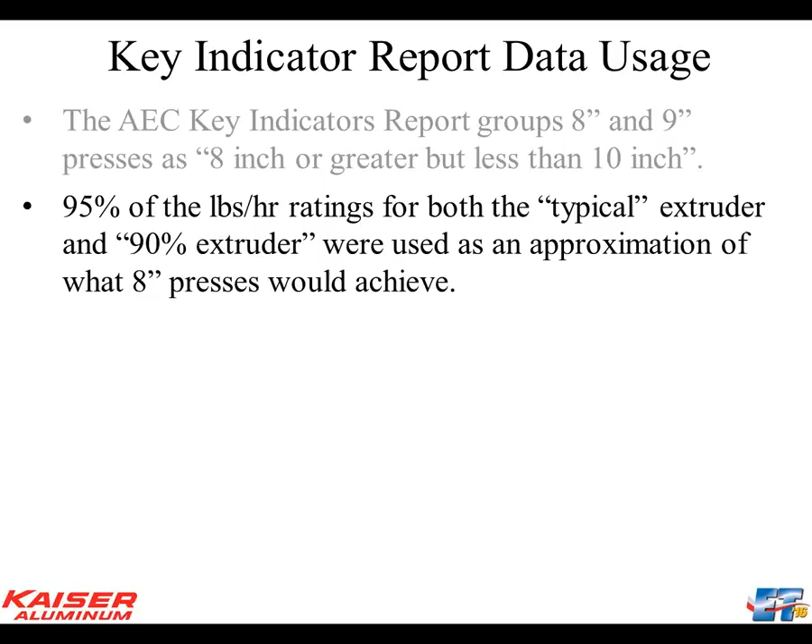It's not 100%, it's something less than that. I'm not sure what the number would be, but I just used an 8 inch press to model all of this. From that point, once I decided that, the classifications are for a typical extruder, it turned out to be 2,272 pounds an hour, and for a 90th percentile extruder, 3,043 pounds an hour.

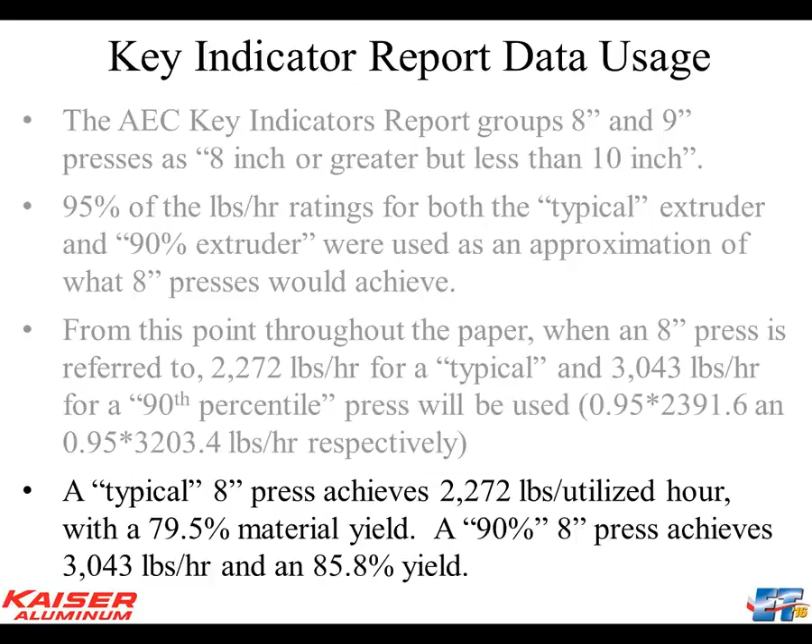And there's also a difference in the yield and the recovery, 79.5% for a typical extruder and about 85.8% for a 90th percentile extruder. So the reason I was trying to focus on these is I was trying to figure out some way to pull the data together in a way that would be useful to extruders to understand what makes a difference.

So I used Werner data that we had developed and used over many, many years for many, many different what-if situations. That's where I learned all of these techniques and developed them.

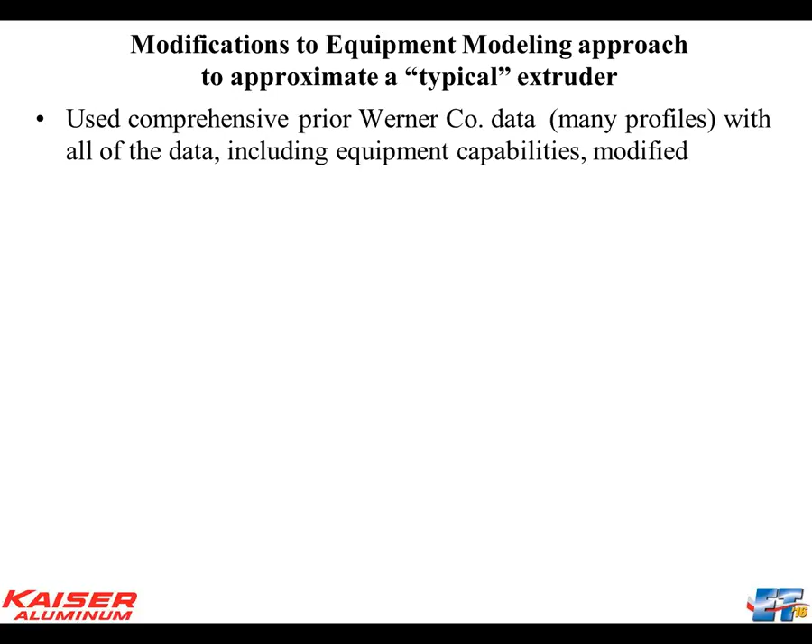That data was all changed. I changed all of the profile numbers. I changed all of the weight per foot. I changed the extrusion velocities, but I at least used it to represent a mix of product. And then I took that mix of product, and in order to get the Werner numbers in terms of pounds per hour and yield at the typical, I had to hobble it quite a bit. I had to slow down the velocity.

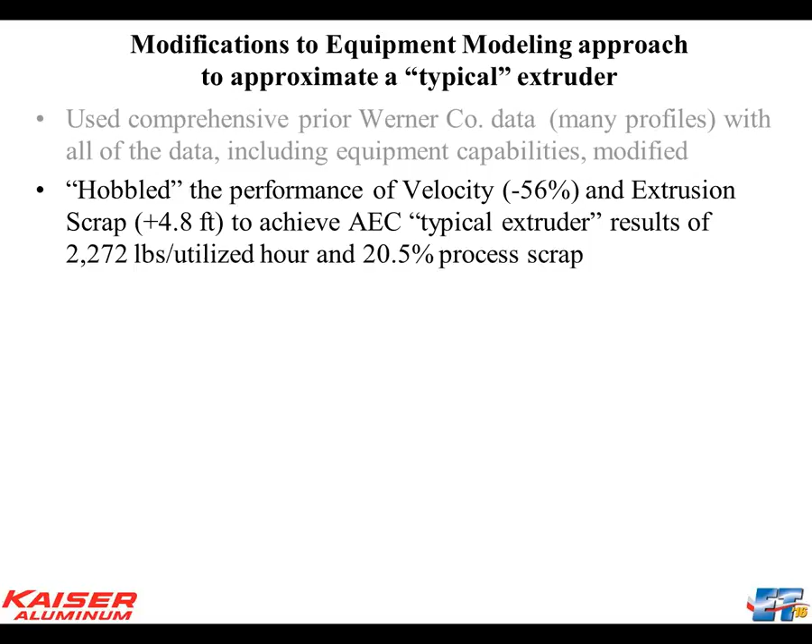We were always known as a very fast extruder, cold and fast. But I hobbled the velocity and added a little bit of scrap in order to achieve the typical extrusion rate of 2,272 pounds per hour and 20.5% scrap.

I did this modeling what I felt might be a typical 8-inch press, 30-inch maximum billet. Billets cut to 2-inch increments, stopping extrusion when the butt size is reached, and some other characteristics listed there. I then ran it through all the different shapes we run, and I asked, what would it cost to run this book of business across this typical press?

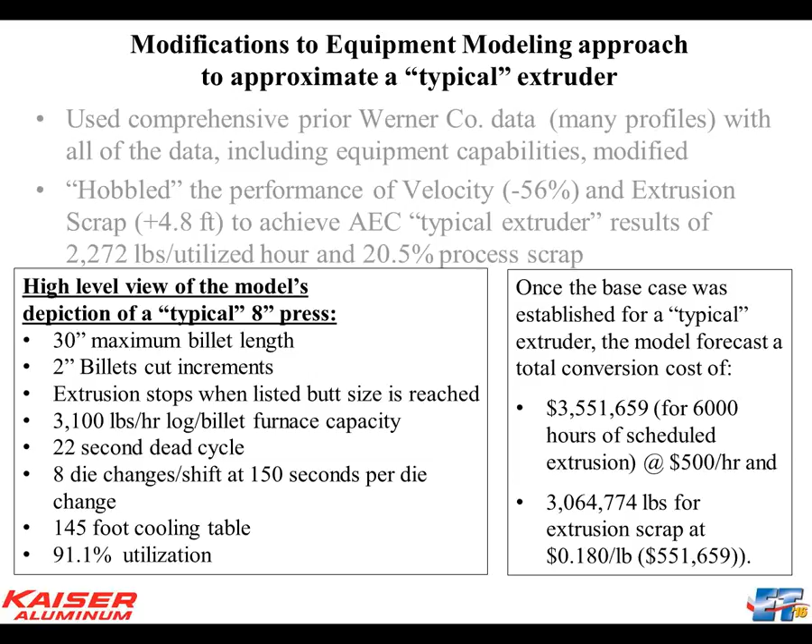It turned out to be $3.5 million a year. That was for 6,000 hours of scheduled extrusion, basically 5 days a week, 250 days a year. Out of that, we would generate just over 3 million pounds of scrap. I had a scrap valuation of about 18 cents per pound to send it out, get it processed, and get it back as log. That was $3.5 million to do it on a typical press.

...1,645 hours of production time because of the higher pounds per hour and the lower scrap rate. That'll save us over $800,000 in costs. If you look at the $3 million versus the $2,177,000, scrap costs will be another couple hundred thousand dollars worth of savings.

Or a total savings looking at if a typical extruder was extruding the book of business, or if it was run on a 90th percentile press, a total difference of about $1 million in cost.

Now, besides that $1 million in cost, you have that 1,645 hours, which if they were run at 3,043 pounds an hour of the 90th percentile extruder, that would give you additional pounds, and I just put in 25 cents a pound of profit just for a what-if.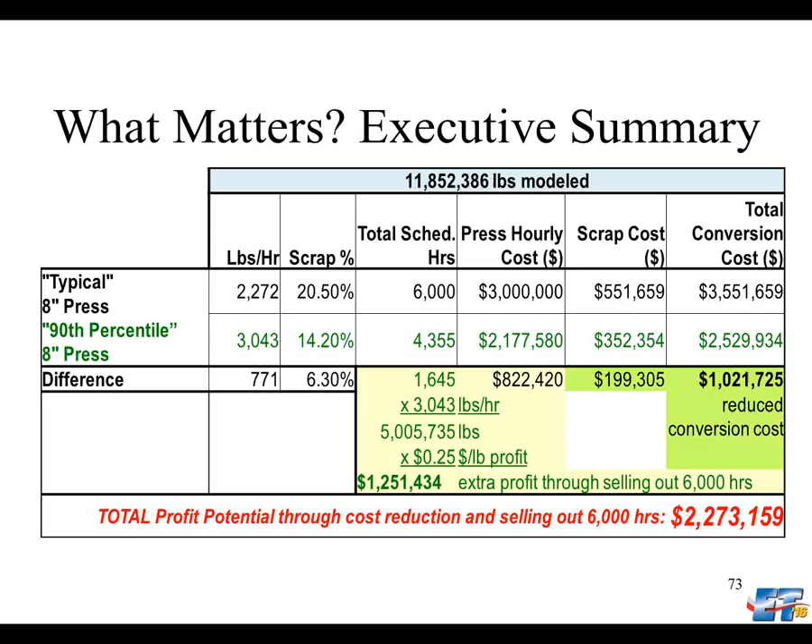So the question is, how do you do that? Well, I tried to use the model to show different ways that we might do that.

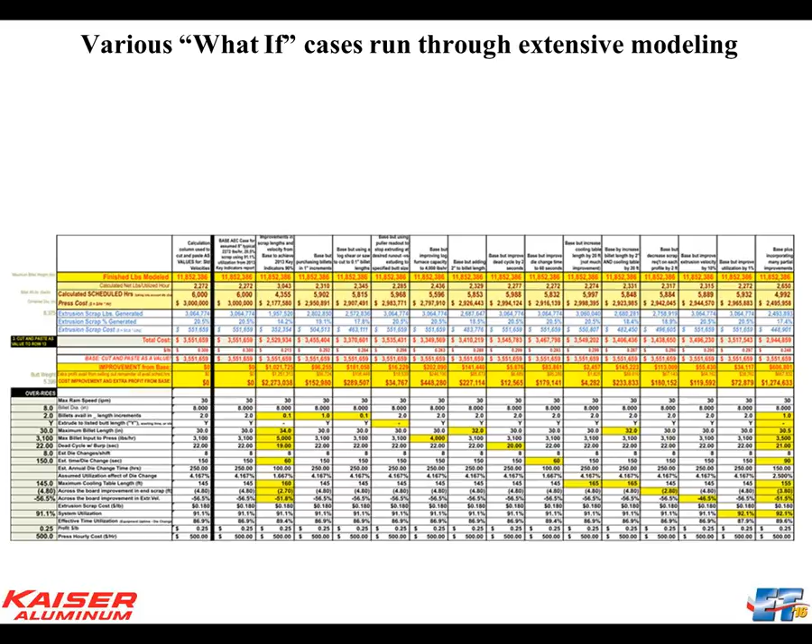When I run these models, I typically run a case, and each one of these columns represents a different case. So in the first columns, these are where I do my calculations, and this is what a typical extruder would be. Just to the right of the dark line is locked in as a typical extruder.

And then I run a bunch of different cases, and you'll see the details for this later, so don't try to stare at the tiny numbers. I'm just giving you the flow of the thought process. I run a whole bunch of different analyses.

Here would be a 90th percentile extruder. And actually, if you look down, you can see the numbers I was talking about, the $1 million here and the extra productivity or extra sales you could have, for a total of somewhere between $1 million and $2.2 million savings. So I run through all these different what-if cases, and the length of the arrow is just trying to show the benefit of each of these, and I probably thought you might want to see more about that, so that's what I delved into next.

So finally I ended up saying, well, we can do all of these things, but to get from a typical to a 90th percentile extruder, there's going to have to be a lot of investment in equipment probably. So then I asked myself, what if I just did partial improvements and layered on a bunch of partial improvements? And you can see I can get halfway there.

I can get, instead of the $2.2 million savings, I can get to about $1.2 million savings just with a bunch of partial improvements. Now this is on a book of business that I used as representative for my analysis, and it's based on particular presses and particular profiles that it was modeled on.

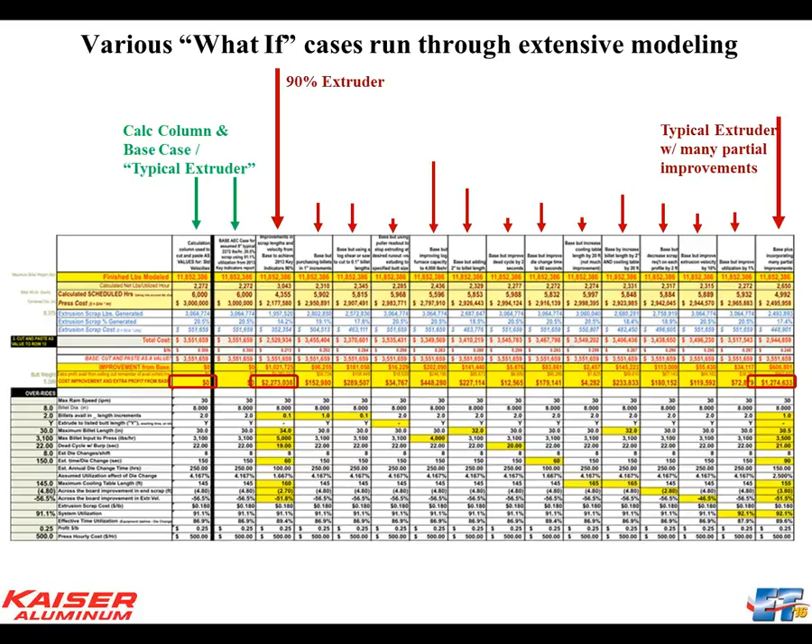But I'm going to show you exactly how that figured out. So the base case was an improvement of 0, the 90th percentile extruder 2.2 million, and finally the typical extrusion with some partial improvements up to 1.2 million of that $2.2 million conversion cost savings.

So here's the listing of all the different cases, and I'm going to go through these in a little bit more detail, but not through every single one of them. Each one of those columns in that spreadsheet, I've just summarized what was done.

If we look at the first two cases, we have the base case and the 90th percent extrusion, but then what if instead of buying it in 2-inch increments, we bought it in 1-inch increments? Our pounds per hour goes up ever so slightly, our scrap goes down a little bit, our cost goes down, so you end up somewhere between the difference in costs here, $100,000 and another $50,000. So you could be somewhere between $100,000 and $150,000. And I did that for all of these different analyses.

If we used a log shear or a hot saw, we could see a benefit of about $280,000 if we were able to sell out the business on the press. If we put a larger log furnace on, because in this case it was modeled with a constraint to the log furnace, a little bit smaller than maybe this press should have had, that would have been a very big savings of $450,000. But that's, of course, only true if the press you're modeling actually has a smaller than required log furnace, or if it isn't tuned up properly.

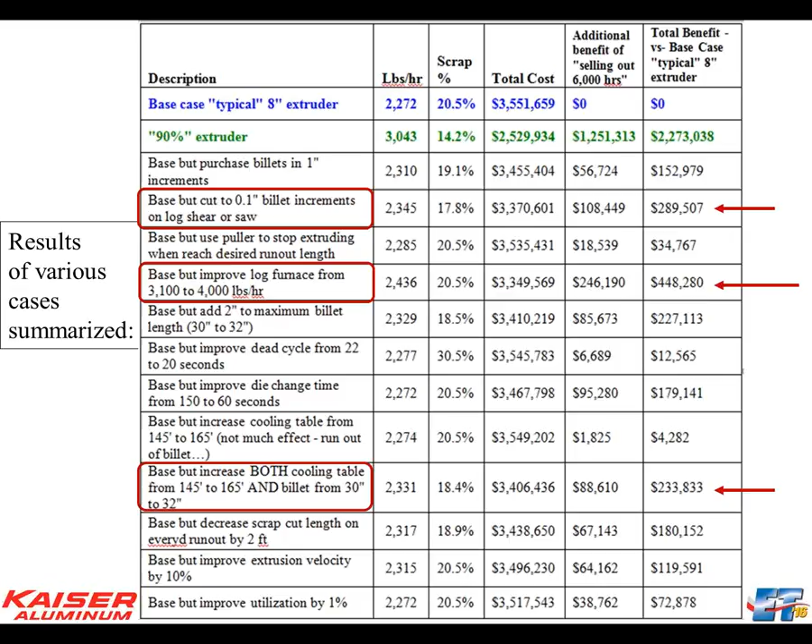And here's a case where we increased the cooling table from 145 to 165 foot, and we increased the possible billet length from 30 to 32 inches, and that's worth a couple hundred thousand dollars. So now let's walk through some of the details.

When I look at what I had to do to call partial improvements to get me to that $1.2 million savings, we went from a 30 to a 30.5 inch billet. So maybe we can squeeze out a little bit longer container liner or just trim a little bit. Use billets in 1-inch versus 2-inch increments.

So you don't have to necessarily put a log shear in, just particularly for the high volume shapes, make sure you're buying them to a 1-inch increment. Increase the log furnace capacity. In this case, I had a low one of 3,100 pounds an hour, but tune it up to maybe 3,500, just making sure that everything is working properly.

Focus on dead cycle. Take a second out of dead cycle. Change your die change time from about 150 seconds to 90. Figure out a way to put another 10 foot on your cooling table. Evaluate your scrap and see whether it's possible to cut 1 foot less scrap per run out.

Maybe by making sure that you've properly etched samples to know whether or not you're getting into coring and other problems, and taking the minimum scrap that's required for each particular shape. And finally, increasing the extrusion velocity by about 5% and the system utilization by 1%, so the uptime by 1%.

So I just wanted to see what would be the effect of layering each of these things in, and over half of the value was there. So while it's good to buy new equipment and put all these things in, just focusing on a number of different things can make the improvements that we'd all like to see in our operations.

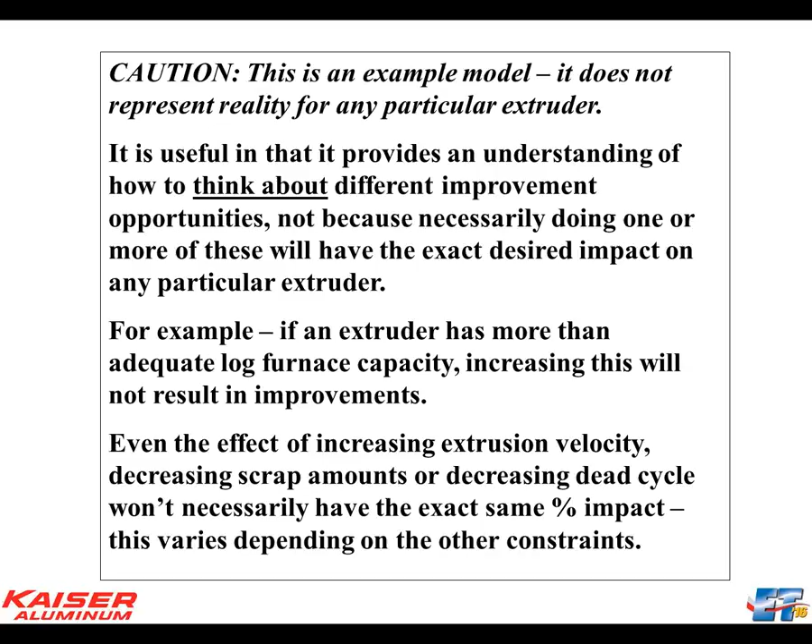This is just an example of some modeling work that was done. It doesn't represent any particular reality, but it is indicative of what can happen by focusing on all the different details that define our processes and our costs.

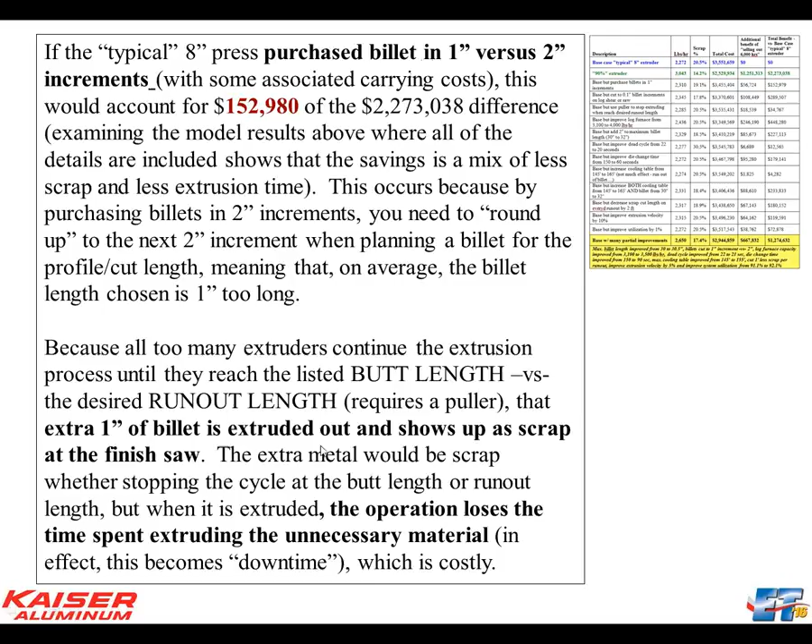So in here, and you'll see it more in the actual ET paper, I have all of the different things that I tried, and I have an explanation of what happened as a result of this. When you read the paper, all of this is documented in there. So it tells, by going from a 2-inch to a 1-inch billet, what happens and why that it happens. So for each of the things that I looked at, it shows the amount of money in red there and also why it happened. I'm not going to take the time now to go through each of these.

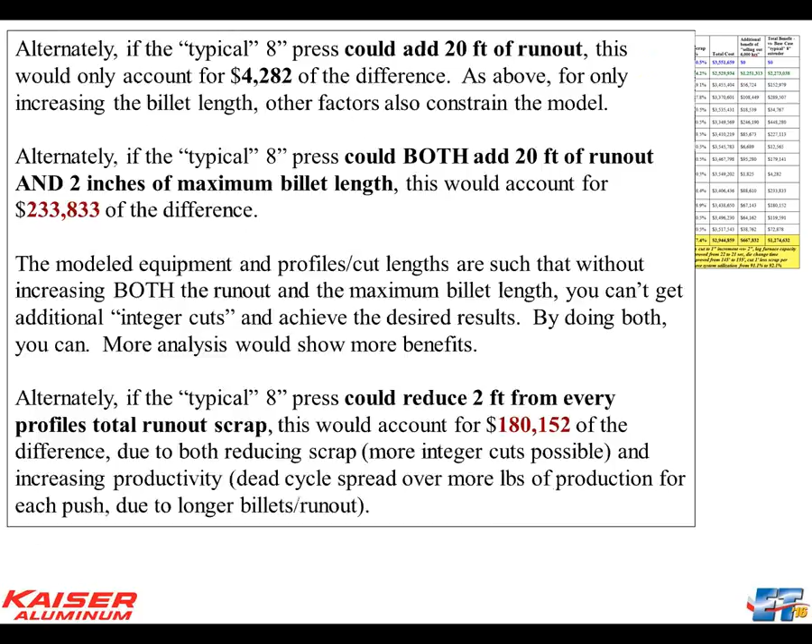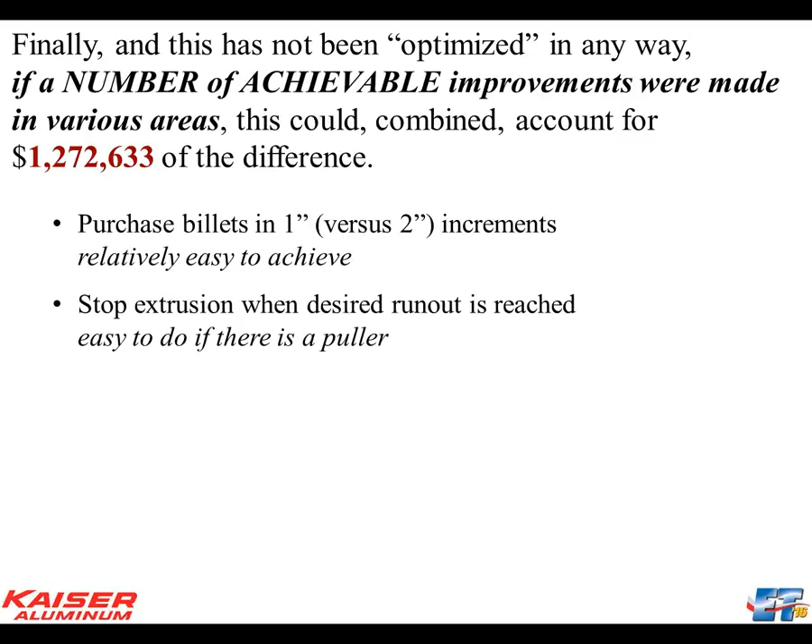But I will say that, for the model that I created, it is possible to get there by doing the things I talked about previously. I listed those out earlier. All these small changes add up, and that's probably the biggest one there, the cooling table increase from 145 to 155. That may take a little doing. But when you model it, you'll know the exact effect of that one particular thing if the rest of the things are held constant.

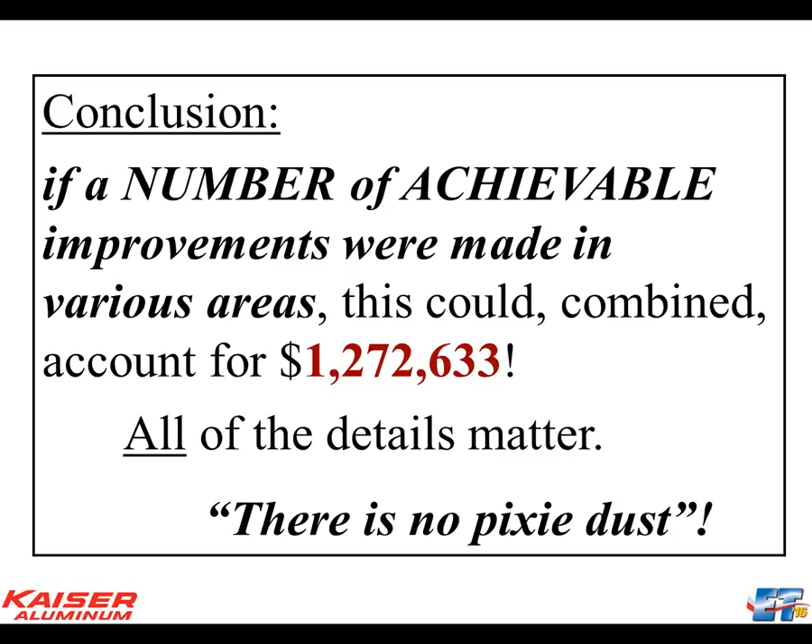The point is, there isn't any pixie dust. There's no magic way to improve. We have to improve by focusing on the details of our processes, of our equipment, of our material usage, in ways that we can combine a whole bunch of small improvements into one really big improvement. So all of these various details matter.

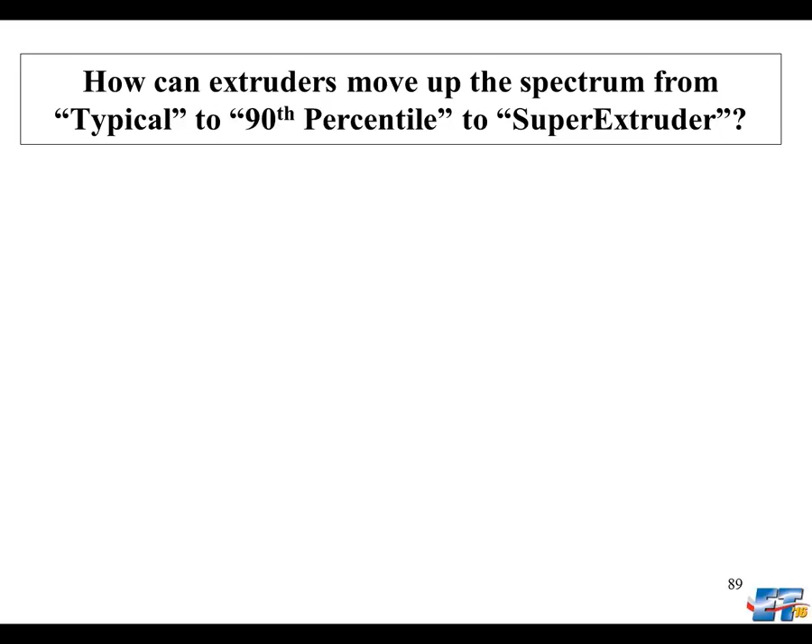So how do you do that? How do you move from a typical to a 90th percentile, or even what Paul Robbins would call the super extruder in his article? First, you've got to focus on what matters in your own operations. Second, there's a lot of help you can get from your suppliers, your equipment suppliers, your metal suppliers. They have a lot of knowledge.

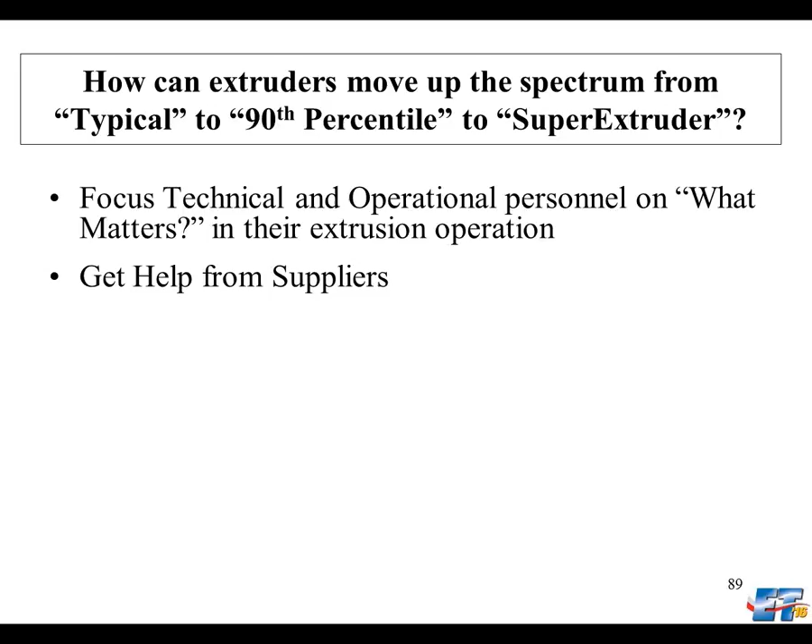Third, members of the AEC have opportunities to participate in process optimization workshops, extrusion excellence courses, die clinics, press maintenance workshops, a bunch of online webinars we've done for years, many in-person offerings, and finally, of course, ET, bringing it full circle back to ET 2016. When you take advantage of all these learning opportunities, it can make a difference.

That is the end of my slideshow, and I'm going to turn it back over to Lissa in a moment. But first, I hope to see all of you at ET 2016 and have a chance to network with you. We look forward to seeing you there at what will be a great event.